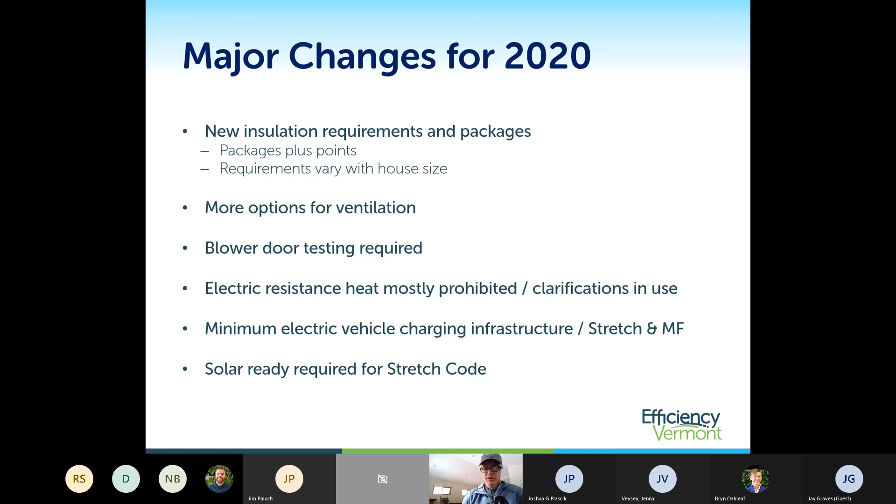At the outset here, I want to make a distinction for everyone in regard to the code and the code handbook. Efficiency Vermont, in partnership with the Department of Public Service, publishes the Vermont RBES handbook, which is essentially a guide to the full code. The ICC published code is the full language of the code. It contains all of the relevant rules, regulations, and guidelines to comply completely and effectively with the code. The handbook is essentially just a summary guide with a lot of actual details in it to help people comply with the code. So the handbook should not be used as a substitute for the full RBES. That's a distinction to be aware of.

You'll see here where you can find access to the two different documents. The ICC website is where you can find the full language of the code, and on the Department of Public Service website is where you can find the handbook, which also has a link there to the ICC site.

Efficiency Vermont's role in all this is we serve essentially as the state's Energy Code Assistance Center. We provide training, support, questions and answers, code support for implementation and application of the code. You can reach us at this number here, our office address, and you'll be connected with one of our customer service teams and/or myself or another energy consultant to answer any questions you may have about the code. The Vermont Department of Public Service is the owner of the code, so they can also be reached with any specific questions.

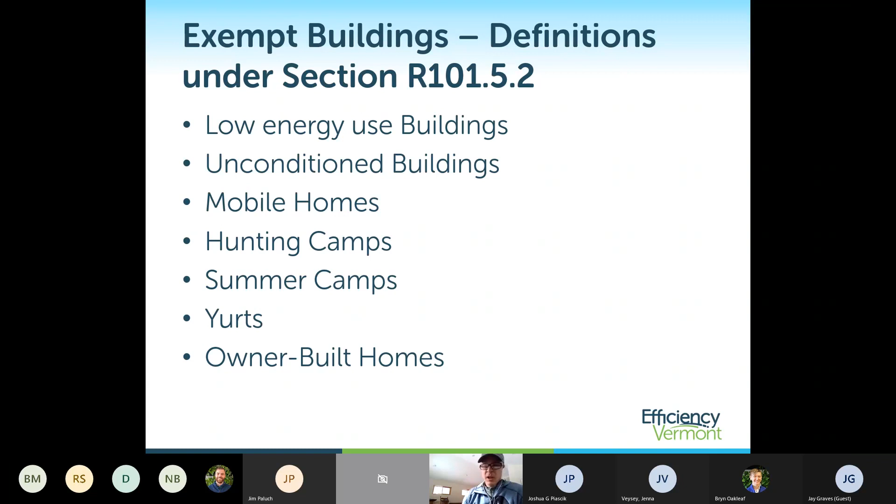Yurts, if you're into that kind of thing, are exempt as well. And then there's specific exemptions for owner-built homes. The owner-built exemption is pretty specific in its application.

In order for someone to use the owner-builder exemption to comply with the code - meaning you don't have to fully comply with all the requirements - you need to be an owner builder building the house for yourself, actually serving as the general contractor and detailing all the construction specifications. You also need to disclose in writing what the differences are from what code requires, and that needs to be disclosed in the code certificate.

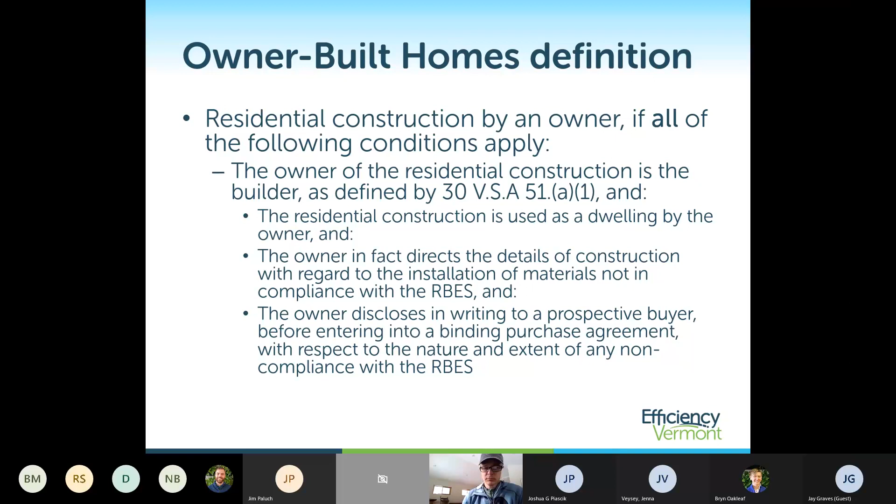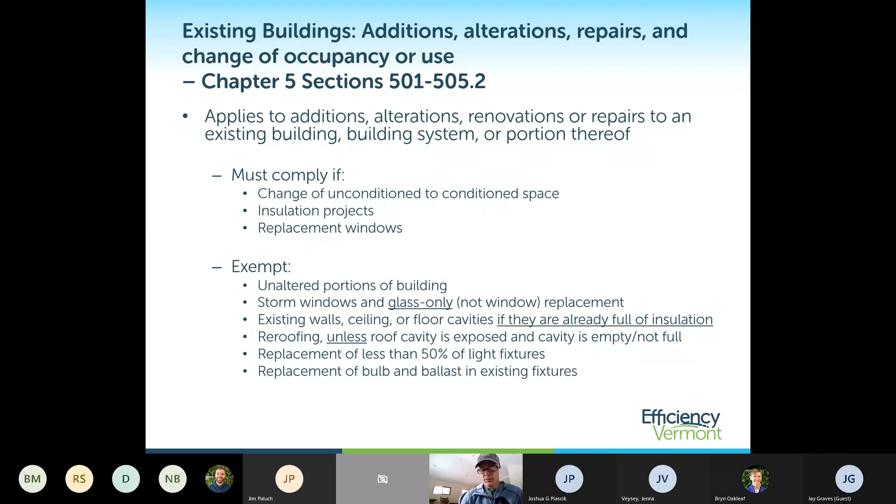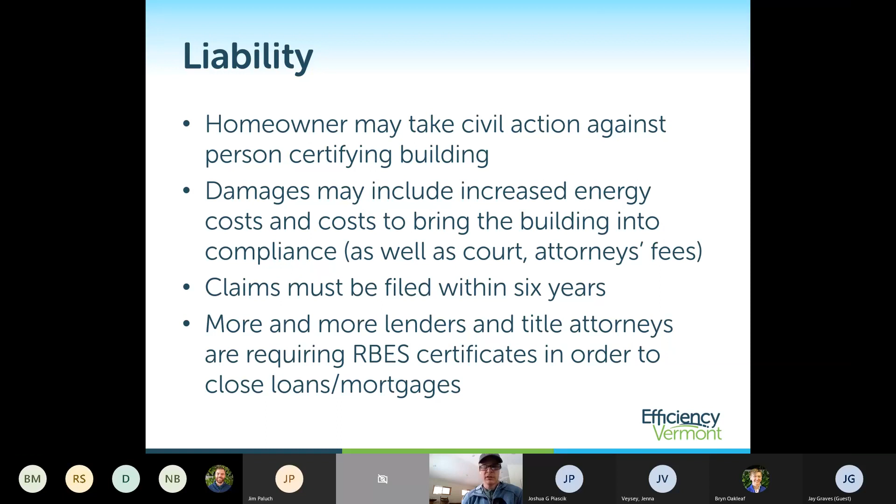There's more awareness now that the code exists and that it is a factor that should be verified in any new construction or major renovation addition project in the state. More lenders, title attorneys, and the real estate and lending industry are becoming more aware of this and expecting to see documentation associated with homes.

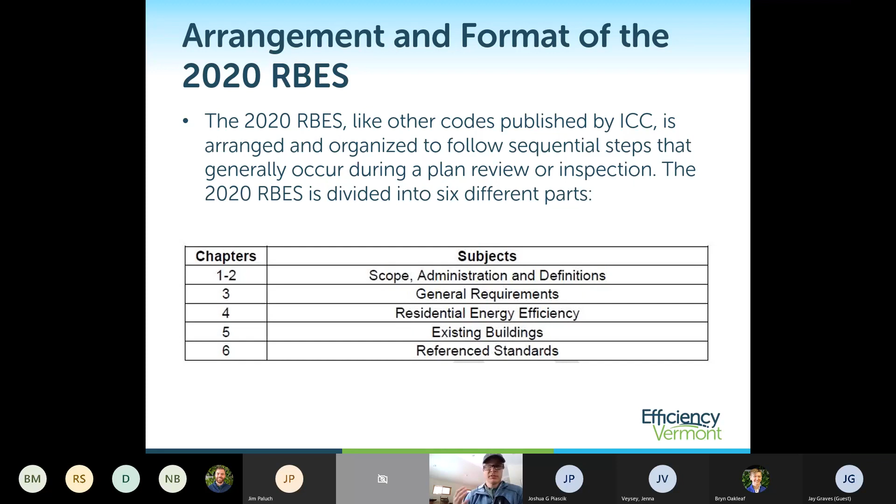Okay, general requirements. The code is basically designed as a construction reference document, so it's designed to be used as a reference point when you're coming up with the design and specifications for the building. The way the code is laid out in chapters kind of follows that process of design and specification. The first couple chapters in the code, referring to the ICC published document, cover the scope, administration, and general definitions for the building. I'm going to go through the slides ahead, which define these things.

Chapter 1 covers what we just went through as far as how the code applies. Chapter 2 is basically a glossary of terms and definitions for terms that you're going to find in the code, and specific definitions of what some of those terms mean and apply to. Chapter 3 is general requirements.

This is defining building load design conditions, what you're using as references for specification for insulation materials, building systems, equipment, HVAC, ventilation, etc.

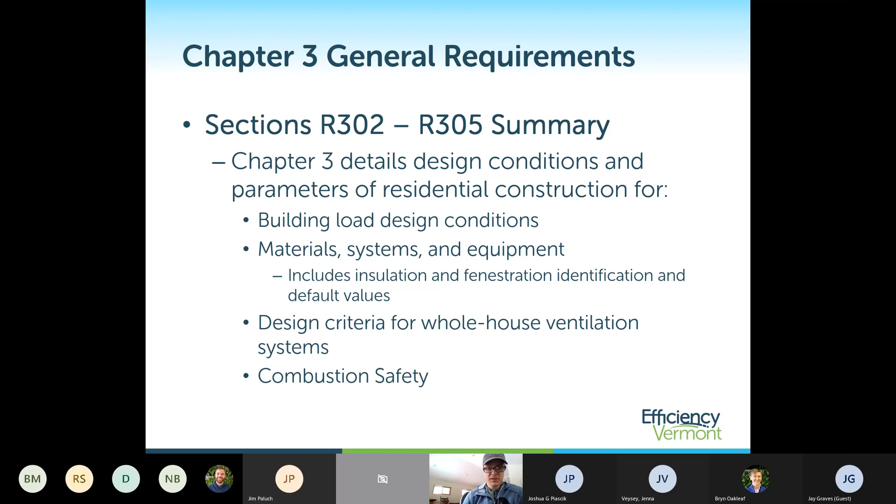Chapter 4 is really the heart of the code, the meat of the code, which contains all of the energy efficiency related requirements. So we're talking relevant R values, window values, air sealing requirements, ventilation and mechanical equipment installation requirements, etc. That's the bulk of the content of the code and what we're going to focus on today.

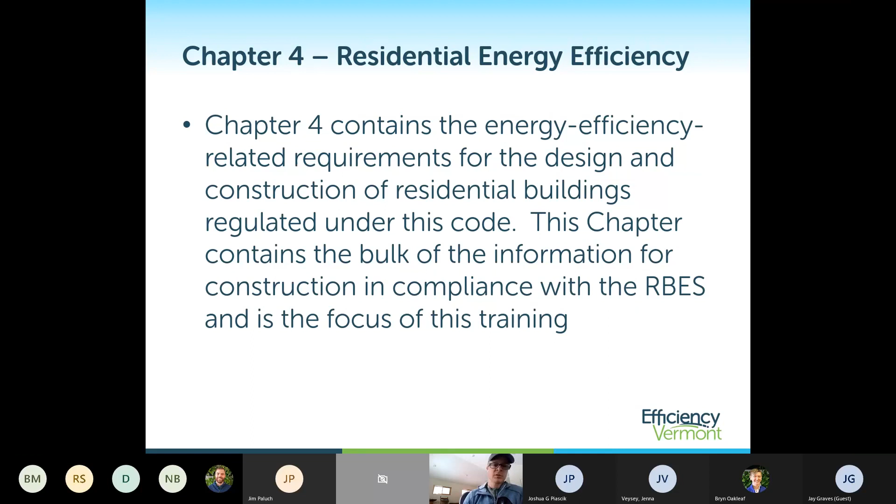Chapter 5 specifically covers the requirements for existing homes and gets into some of the nuances of how that works. Finally, Chapter 6 is reference standards - these are industry-related standards and other codes that overlap with the energy code and are part of the overall code purview when it comes to residential construction.

So we're going to dive now into the details, getting into Chapter 4. You can see this is referencing Section 4, so R4 - this means Chapter 4. If you're going to follow up on some of the content here after the training, the sections that I'm calling out in the slides reference these sections within the code document itself, the ICC code document.

There are 3 different pathways to comply with the code. The prescriptive method is essentially you're picking a package out of a table of 5 different packages, where that package contains different performance specifications for different building components. You can choose a package to follow, meet all of the specifications in that package, and then follow the other general code requirements that overlap with that to comply with the code that way.

Alternately, you can use ResCheck software, which is an online web-based modeling tool that allows you to substitute higher values for lesser values in certain areas of the building, providing a bit more flexibility. Finally, similar to that is the home energy rating method, or HERS rating, where you're actually working with a third party to do the building verification for you. Similar to the ResCheck method, it offers some more flexibility in regard to moving around the component requirements within the building.

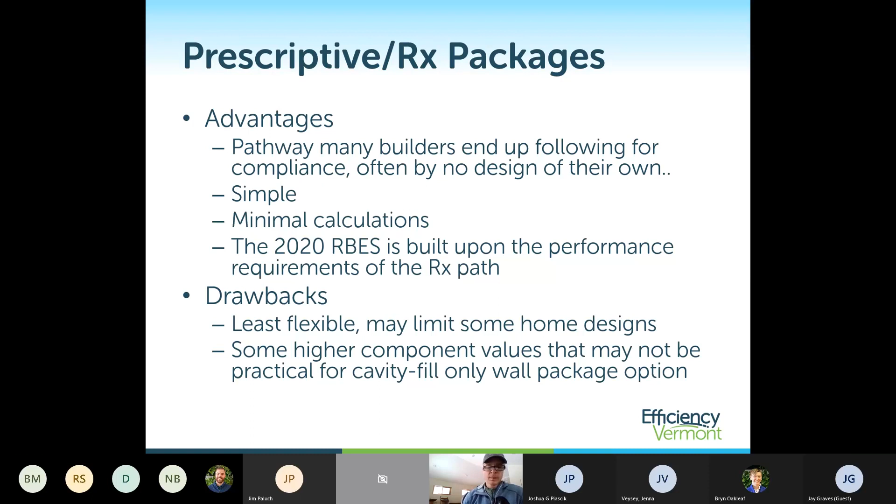The way this is functioned, there's 5 packages here to choose from. This is table R402.1.2.1 in the code, and this is the table you would reference to choose a package to comply with.

Log homes have their own package here, so they're special unicorns in their own right. You have a separate code to reference if you're building a log home. The reason being is that a log home is built out of just that, logs, and it's entirely different in performance than a building built out of dimensional lumber, where you have building cavities to fill with insulation.

So those prescriptive packages you're essentially dealing with for standard stick-built construction are going to be these 4 packages. You're laying out different building component R values - ceiling, walls, foundation walls, windows, etc. What you're looking at here is picking one of these 4 packages to comply with.

Package 4 and package 1 are kind of the two - sorry for PowerPoint getting ahead of me on this - package 1 and package 4 are kind of the 2 most common building envelope packages people will orient towards.

Because what this is showing here is R20 cavity for a wood framed wall. This means your standard above grade framed wall. This is a package where you can build a wall with just insulation in the wall cavity and be compliant with code. Code is moving in the direction of requiring continuous insulation of some type on above grade walls.

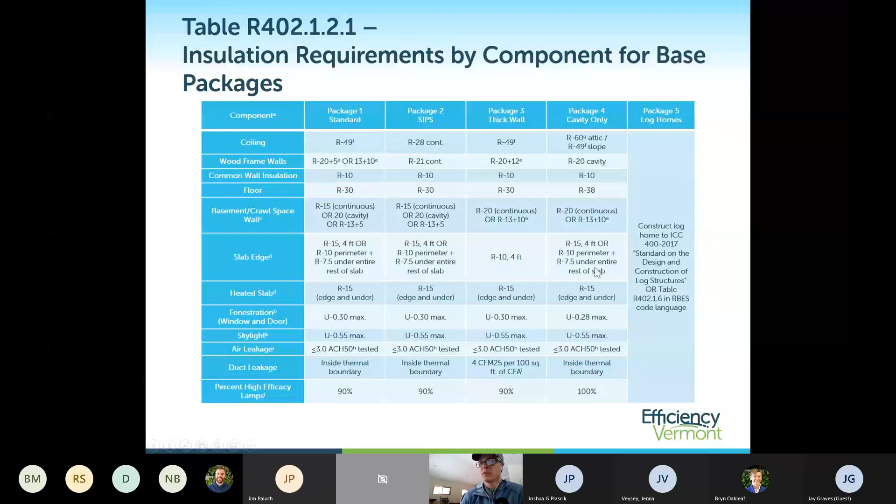The prescriptive package has been around from pretty much the beginning as a way to comply with code. A significant change for 2020 is that now, as well as meeting the specific requirements called out in those packages, based on the square footage of the house, you're going to need to gain points from a points table, which is essentially raising the performance values in parts of the building at your discretion.

To attain the required points here based on the square footage - focusing on single family residential, if you have a building less than 2,000 square feet, you need to meet all of those package requirements and then gain 5 points. If the house is between 2,000 and 4,000 square feet, you need to gain 7 points. Anything greater than 4,000 square feet, you need to gain 10 points.

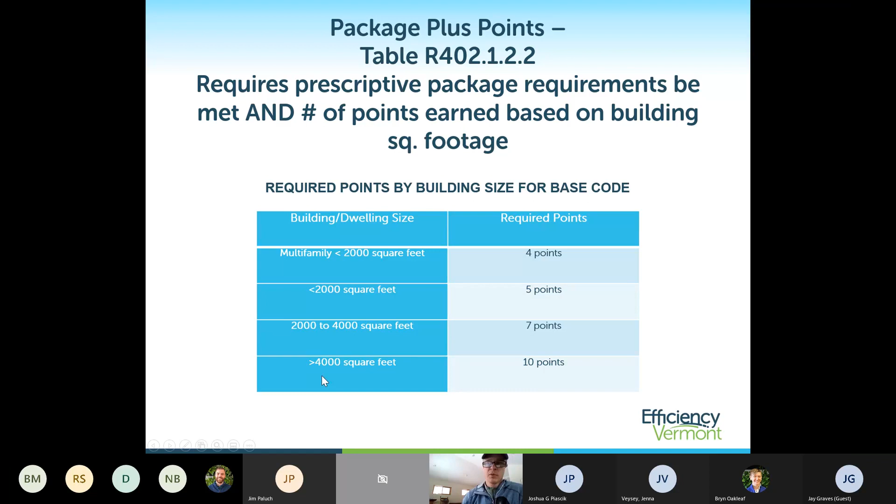So what this means is, in the code, as well as that table that shows you the packages to follow, there is this table which gives you points options for different parts of the building where you can attain points. So if you choose package 4, that's a cavity-only above-grade wall package, where you can do R20 in a stud bay and comply with the code.

If you need to gain points, you can go to this table and choose to do continuous insulation of some type and earn points by doing so. You can add R12 of continuous insulation to that R20 wall and gain 2 points, or go to an even higher performing wall and gain 3 points.

You can up the ante in the attic for insulation, going from R60 to R80 and gain a point. You can install better windows than the minimum called out in the package and gain some points.

There's also avenues for making the building envelope tighter and gaining points there. Going from exhaust-only ventilation, which is allowed in the base code—meaning just using bath fans on controls as your mechanical ventilation requirement for the house, which we'll go into more detail later—you can swap from that to a balanced heat recovery ventilation system and gain points there.

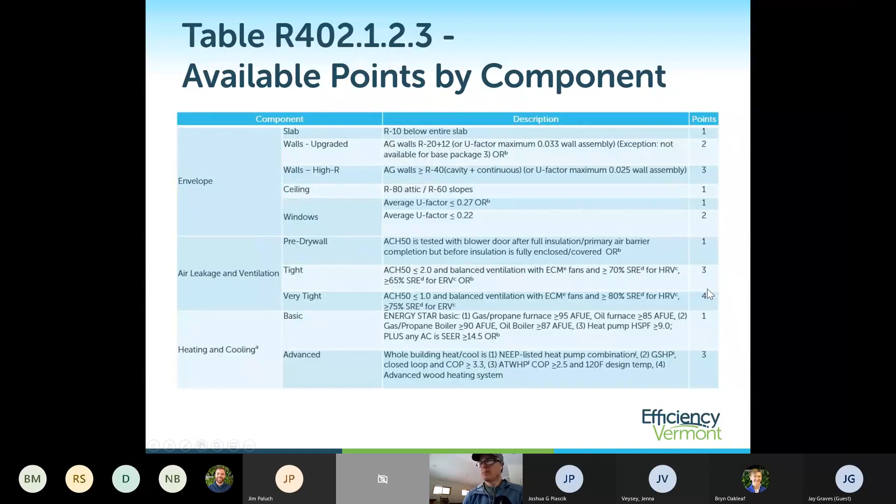You can put in higher performing heating and cooling equipment. You can put in higher performing domestic hot water heaters as well. And there's ways to gain points focusing on water use here in the code as well.

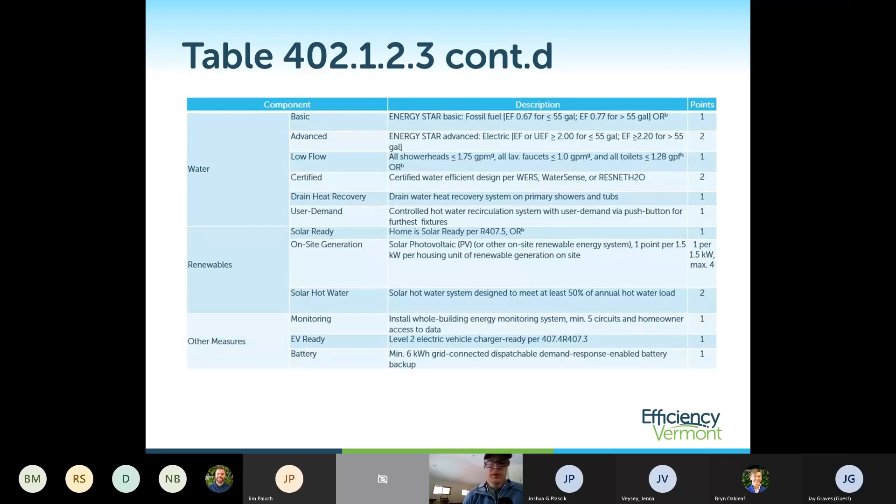So this is a significant change from the previous versions, and something to be aware of as you're going through the options for how you want to comply with the code. Any questions at this point?

Okay, we'll keep the ball rolling here, jumping ahead to stretch code. As I mentioned at the beginning, if it's an Act 250 permitted project, or if you are building a house in South Burlington, you need to meet a higher level of performance, which is stretch code.

Stretch code has packages as well, but you'll see here that it's a higher level of performance. If you need to meet stretch code, you can no longer build a cavity-only insulated wall—you need to be doing a continuous insulation wall assembly of some type. You're also required with stretch code to use balanced heat recovery ventilation instead of exhaust-only ventilation. The window values are a little bit higher or lower, depending on how you want to define it. So there are some performance bumps you need to take to meet stretch code.

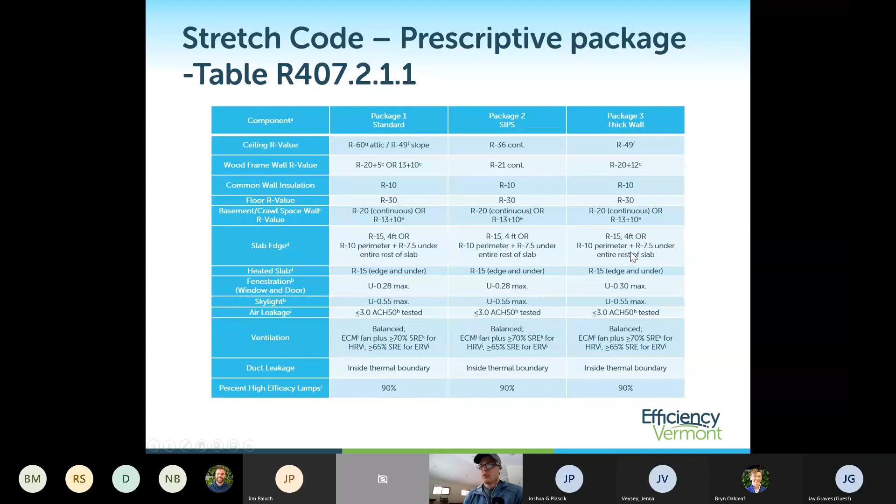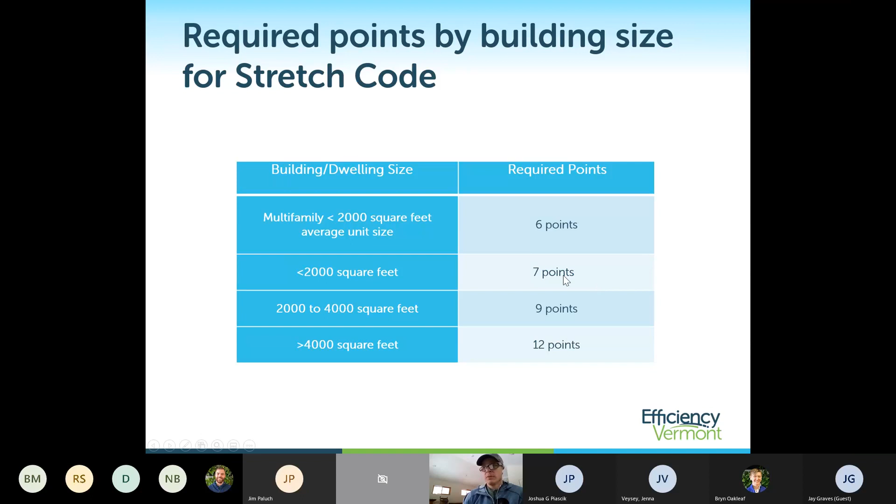Similarly, though, the same as with base code, you still have a points requirement here based on square footage, and you can see that the points to be attained are even higher. So you have a little bit higher threshold to meet in regard to points. So you do need to still meet that.

There are a lot of other requirements called out in the code in Chapter 4, as far as installation requirements and other air sealing details, etc., which we're going to touch on here in a moment. All of those requirements need to be met if you need to follow stretch code as well.

And you only have 2 options to comply with stretch code instead of 3. So you can use the packages approach, the prescriptive package we just showed here, or you can have a HERS rating done. You do not have the option of using ResCheck to comply with stretch code.

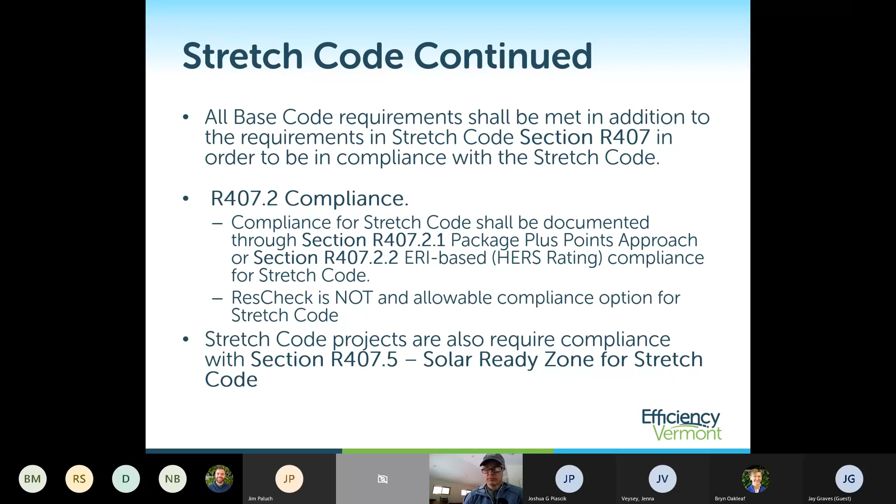So jumping back into base code requirements here. As an alternative to doing the prescriptive packages, you can use a weighted U value or U factor approach to comply with the code. This is essentially an alternative to doing the prescriptive tables.

If you want to use ResCheck as your compliance method, instead of looking at R values in building cavities, you're looking at the overall performance of an assembly by doing a UA or U factor calculation as an alternative to complying with the prescriptive R values in the code. The ResCheck software does that modeling for you, and it is an option.

Though in order to use ResCheck, you do need to up the ante in a couple places—you need to make the building envelope tighter, and you need to have a much tighter air sealing strategy and envelope to use the ResCheck or UA alternative. And again, you need to go from exhaust-only ventilation to a balanced heat recovery system if you're going to use the ResCheck or UA approach.

So just briefly to touch on what this means: R values are basically the resistance of a material to heat flow. U value is basically how well a material conducts heat. So they're an inverse of each other.

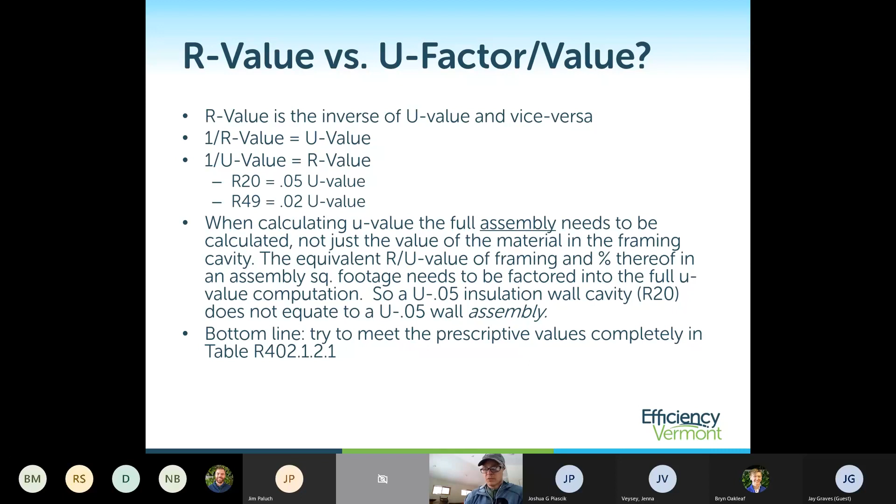Any questions on that?

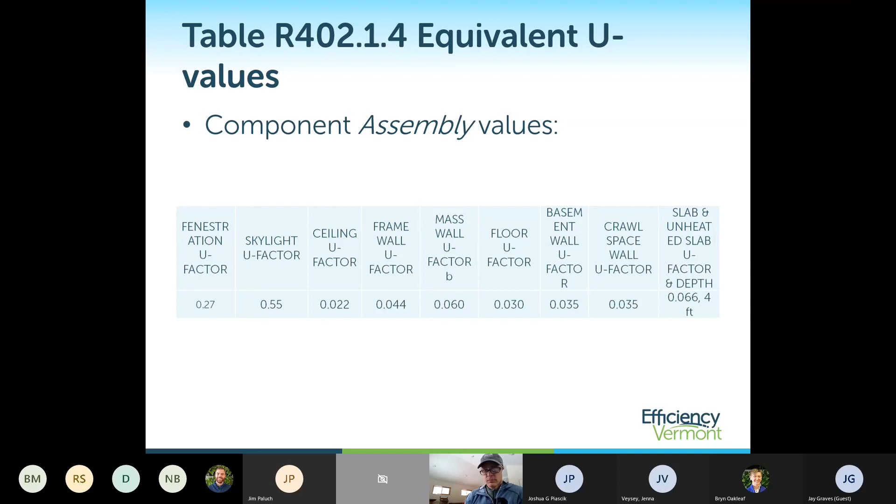Okay, keep the fire hose going here. Some notable alternatives, exemptions or exceptions in the code. There are a few things called out in Chapter 4. As I said, Chapter 4 is kind of the meat of the code, which gets into all of the real details of the building envelope and R values and installation requirements for those areas.

R49 for an open attic is kind of a standard base R value for any of the packages. There is an exemption in the code to use R38 in place of R49 if that R38 covers 100% of the ceiling area. Essentially, at the eave and at the exterior wall dimension, you can have full height of insulation to achieve R38, and carry R38 across the whole ceiling flat, which would be seen as equivalent to R49. Whereas, more typically without a raised heel truss like this, you have reduced R values at the eave because of the diminishing height of the roof rafters coming down to the exterior walls.

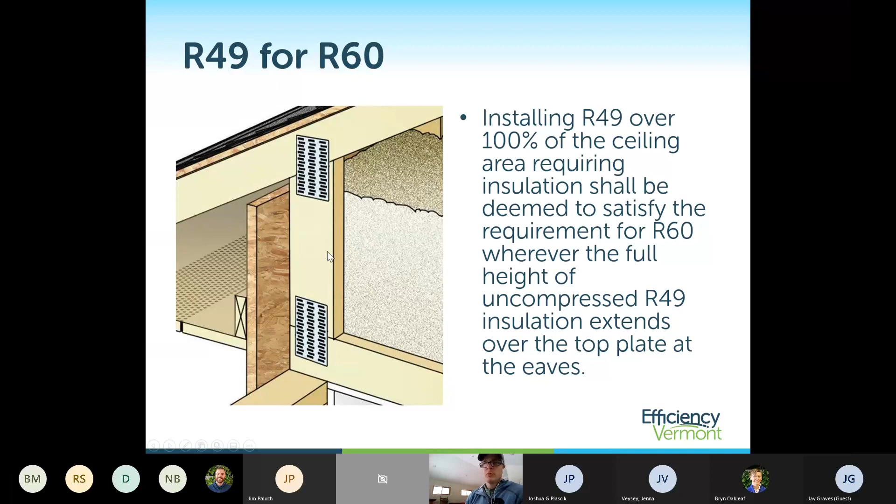Alternatively, where the code requires R60 in a ceiling flat, you can comply with that using R49 with the same performance specification—getting full height of R49 all the way out over the top plates of the exterior walls.

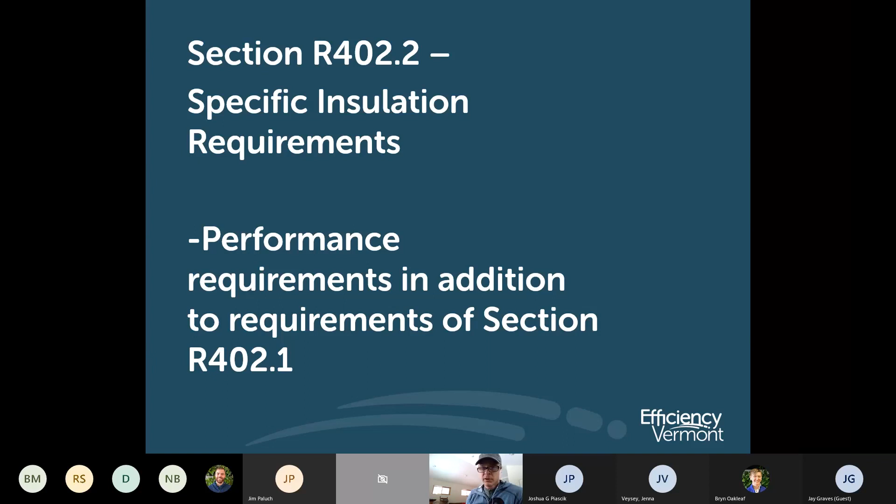Carrying on this theme, some more specific insulation requirements. There's a table and more specific detail in the code, which gets into the definitions and delineations around how to properly install insulation materials, air barrier materials, and vapor control layers within the building envelope. So it's not as easy as just saying I've got an R42 or an R30, whatever, in the building—there are specific requirements on how those materials are installed and how they behave together.

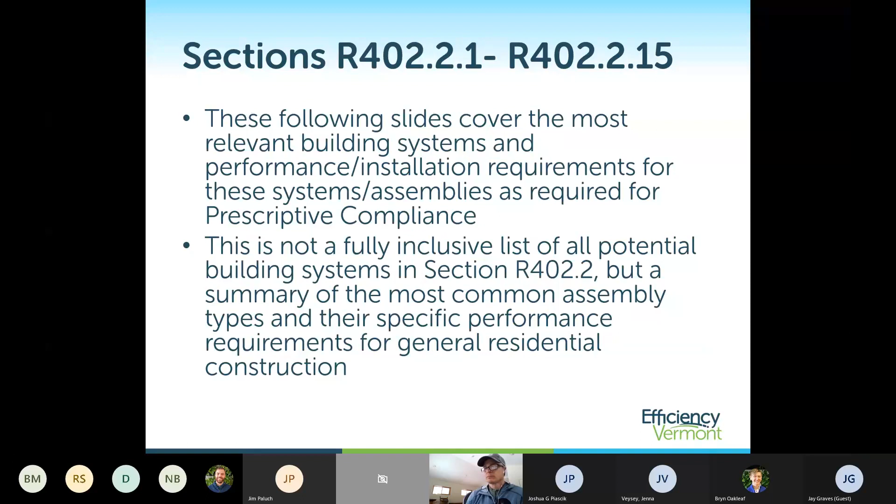Any building assembly is a system of parts and components and pieces. It's like a giant Lego set, and you got to make sure that all of those parts and components and pieces are interacting appropriately together and behaving well together. That's the reason why there are these types of call outs in the code, to make sure that proper alignments occur when putting the building together.

One of the bigger things to be aware of in this section is unvented roof assemblies—basically cathedral ceilings, vaulted ceilings. There are some concerns about different approaches to take when you're putting that sort of closed cavity together, so there are specific options in the code called out about how to put together a cathedral, vaulted, unvented roof assembly.

It can be air impermeable, meaning the insulation material put into the rafter bay will not allow air to move through it—that's an air barrier type insulation. Alternatively, air permeable insulation can only be used in the cavity with some additional built up continuous insulation on the roof above it. A third option is a blend of those two, where in the rafter bay you have a mix of air impermeable and air permeable insulation. This is kind of referred to as a flash and fill assembly.

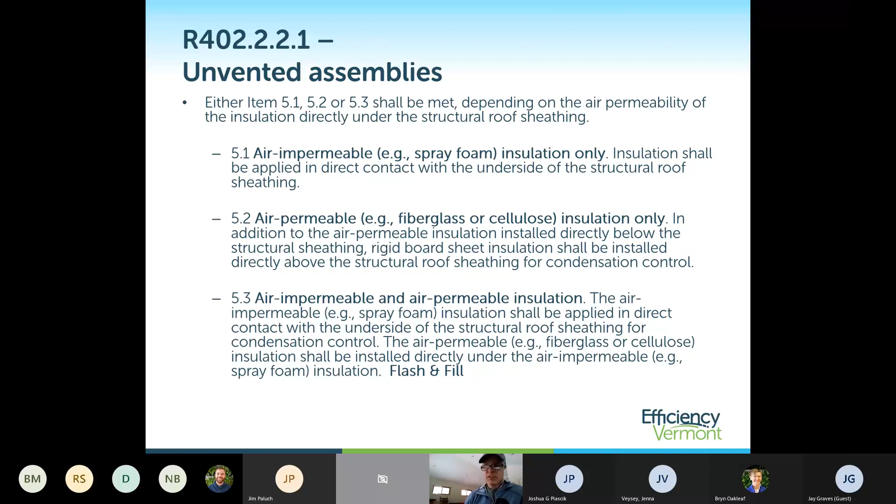As an alternative to this pathway, there's the flash and fill approach, where you're actually installing closed cell foam to get half of the R value required in the assembly, so half of R49, spraying that against the roof deck, the roof sheathing, and then filling the balance of the cavity with cellulose insulation or blown in fiberglass, or sometimes a batt of insulation, rock wool or fiberglass.

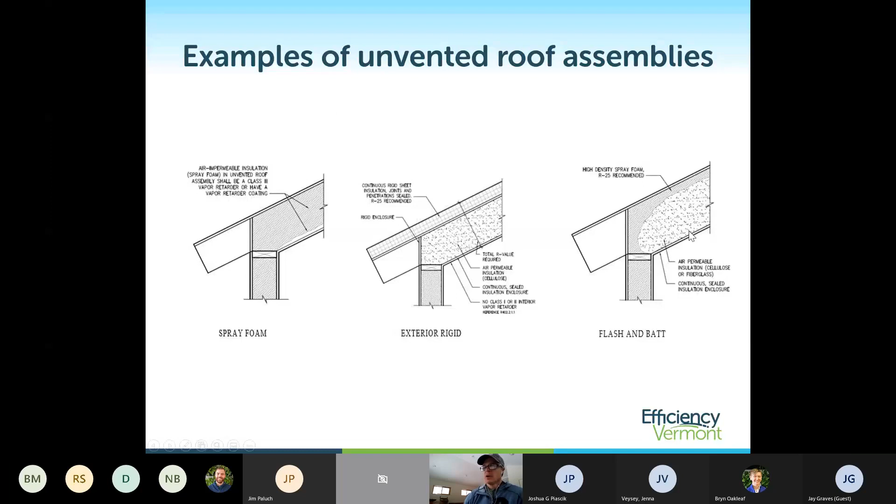Just to reiterate this in a little more detail, again, air impermeable, spray foam only. It has to be closed cell foam. It cannot be open cell, because open cell foam will allow moisture vapor through it. Essentially you're protecting the roof deck from condensation by having significant R value in the cavity and R value that does not allow moisture vapor to move through it.

Alternatively, cavity only insulation, or cavity insulation that is air permeable, so cellulose, fiberglass, mineral wool. You can do that without a ventilation cavity as long as you're protecting the roof sheathing by having adequate R value of rigid foam insulation, or rigid insulation of some type, above that roof sheathing. So that's an alternative.

And then again, the flash and batt approach, where you're putting closed cell foam directly against a roof deck to half of the required R value, and then you're building out the balance of that with fiberglass, rock wool, cellulose, etc. Any questions on that?

Sure, looks like we have a question. Evan? A couple questions popping up. Feel free, if you can unmute yourself, feel free to speak. So I have a question. Go ahead. Sorry, it's relating to fenestration.

If I just, when calculating your average U value, you said total assembly, which is, I'm assuming, center of unit as opposed to center of glass value. Can we take the average center of unit U value instead of having to do a formula using square footage of glass?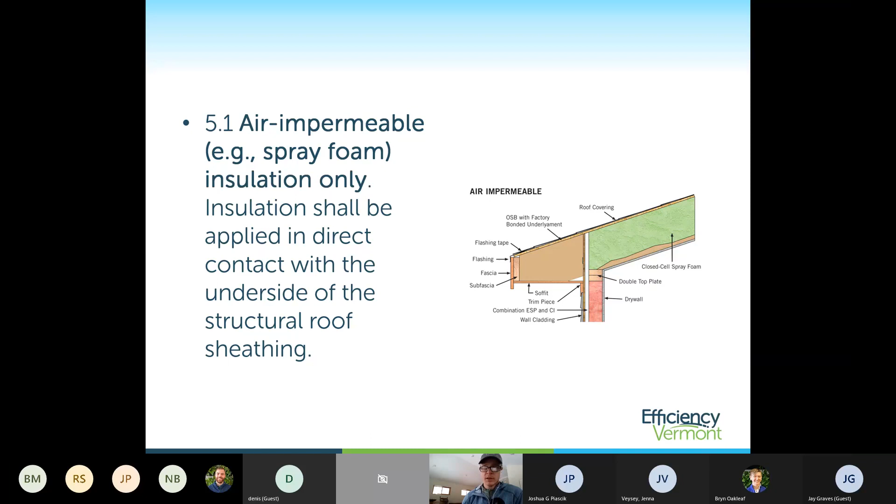So probably the bomb-proof approach is filling the cavity with closed cell foam to the appropriate R value, making sure that foam's installed under the right conditions so it doesn't shrink in any way, so you're not putting yourself at risk of condensation on the sheathing. Again, these other two approaches can be just as equally effective and perform just as well, so long as you're taking into account that you're getting 50% of the R value in the closed cell insulation material and the other remaining 50% in the vapor open type.

And ultimately, if you have the ability to install an air vent channel, that would be even better yet. An air vent channel is only really coming into play if you're using fiberglass, rock wool, mineral wool, a vapor open, vapor permeable insulation, and you're trying to just get that R value in the rafter cavity.

The trick with it right now is that any cathedral or vaulted ceiling needs to meet R49 in the code. So trying to get R49 with fiberglass, rock wool, mineral wool, or any fiber insulation in a 2x12 rafter and get a vent space in there is not attainable.

You have to go to a TJI or another type of rafter assembly to get it deep enough to accommodate that R value in fibrous insulation. So what you're saying is, if you go with spray foam filling the entire cavity, there's no need for an air channel. Correct. Yep. And the spray foam guy that I just did a house with highly recommended a vent channel, saying the spray foam will last a lot longer and you don't get any deterioration underneath the OSB if you have a vent channel. So, that was just an opinion, basically.

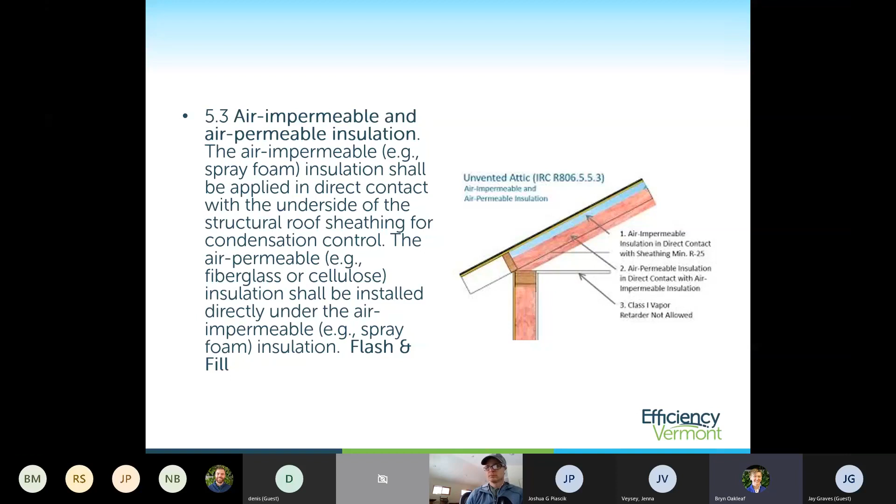One other important requirement, regardless of ceiling type, whether it's a flat open ceiling or vaulted rafter cavity, is eave baffles preventing air from the soffit and outside of the building from interacting with the insulation in the ceiling flat or rafter bay. So you need some sort of air impermeable barrier at the soffit to keep air from mixing with this insulation. That's a big one to attend to.

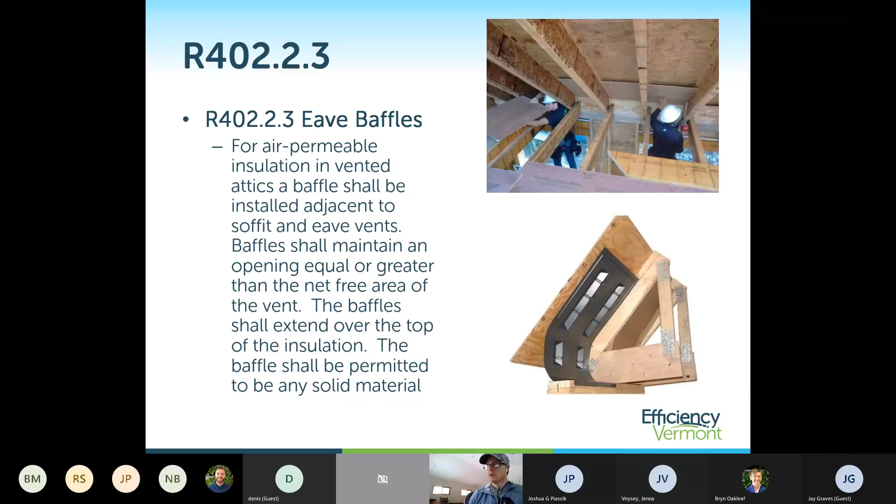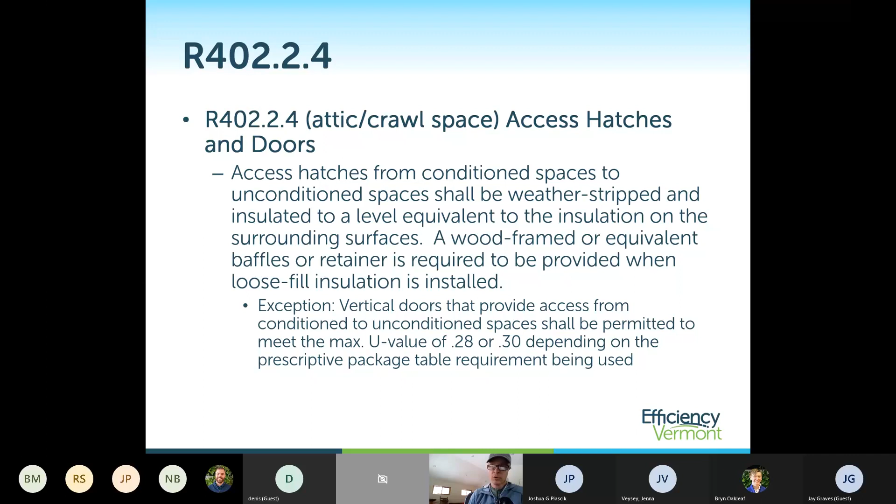Access hatches and doors: anything going from a conditioned space to an unconditioned space needs to be treated like an exterior entry door. If you're going into an attic, the intent is for that hatch to be insulated to an equivalent R value, or close to it, of the ceiling or attic assembly it's going into. So we're talking a baffle to retain the insulation in the space above it, adequate R value typically using rigid insulation on the back of the access panel, and then a gasket to make that panel airtight when it's resting against its stop to get into the space above it. If you're going into a knee wall space, the same approach applies.

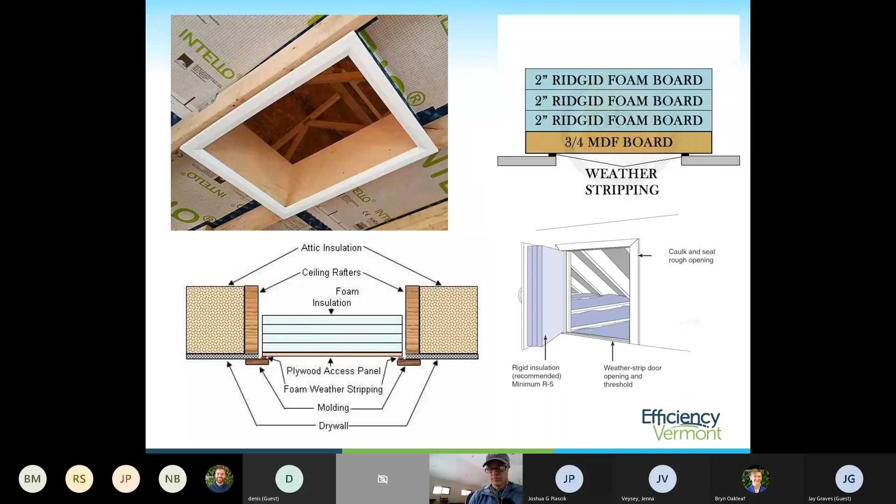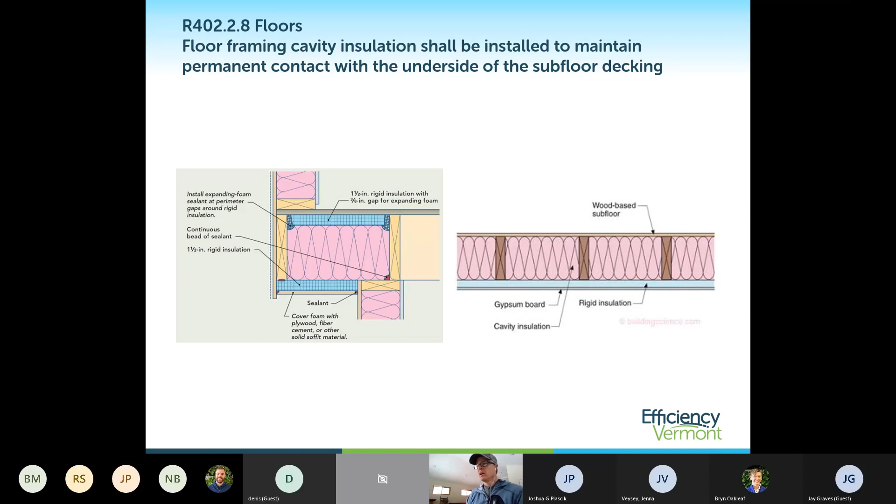Floors: if you have a cantilevered floor or a floor assembly insulated over unconditioned space, the insulation needs to be installed in that cavity in permanent contact with the floor system above. You don't want an airspace between the insulation and the floor deck above; it needs to be in full contact all the way around. Again, these aren't all the details required in the code—this is just a summary of some of the high points of the more common details.

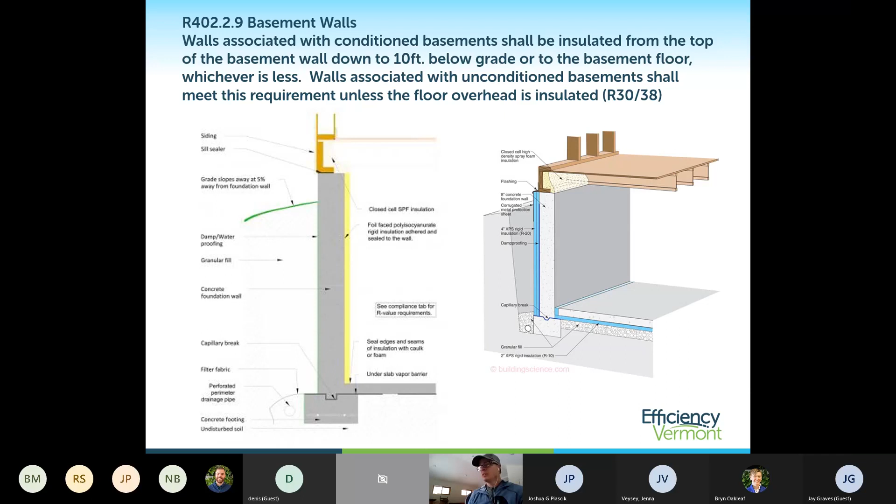Basement walls, foundation walls: any conditioned basement or space that contains distribution equipment for heating or conditioning the house needs the walls fully insulated down to 10 feet below grade or to the basement floor, essentially insulating the entire wall. The only exemption is if that space is truly unconditioned, then you can insulate the floor system above it instead. The code doesn't specify that you must insulate the inside or outside of the foundation—you can insulate a little on either side, or frame a wall in front of the foundation. There are different ways of skinning the cat here, pardon the pun, Tom. So there are different ways to achieve this.

You're not bound to one way of insulating the wall versus another in the code. It just comes down to the R value requirement. That said, if you are going to insulate the foundation from the inside and it's going to be left exposed, unfinished, then you need to use a rigid foam board that has a fire and ignition barrier approved facing on it as an assembly. Or if you're using spray foam insulation to reach the required R value for a foundation wall, that foam also needs a thermal ignition barrier paint or coating on it.

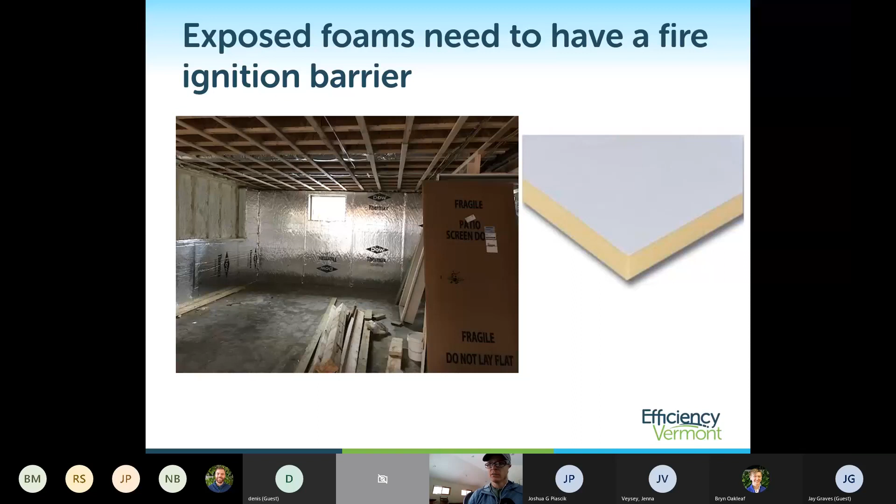Insulated slabs are only required if you have these conditions—where it's an exposed slab to ambient outside conditions, or if it's a heated slab. The code does not require you to insulate under a slab if it's an unheated slab that is below grade. So if you have a standard 8-foot basement and foundation, and it's just a rat slab down there that's not heated, that slab does not require insulation under it per code to comply.

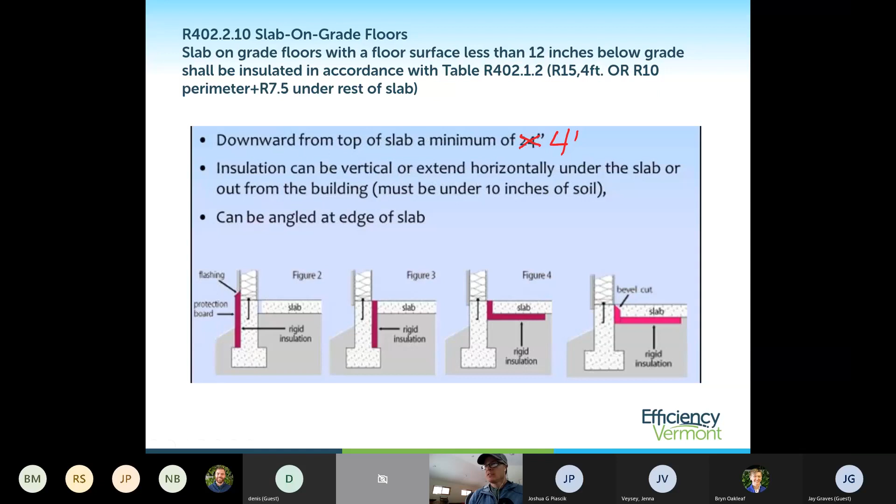From a building science standpoint, it's highly recommended that you still put something underneath that slab because concrete is highly conductive and can have a big impact on comfort and energy load to the house, as well as be a condensing surface in the summer months. But that's just a distinction to call out in the code.

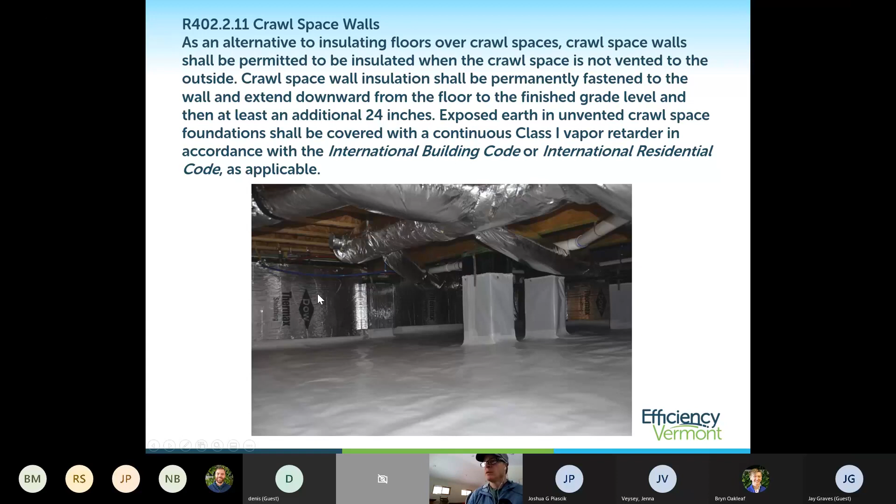Crawl spaces. As an alternative to insulating the floor system, if you have distribution in that crawl space, as you see here, then foundation walls can be—or would need to be—insulated in this circumstance to the same requirements as a basement would be. If there's just an excavation down here with exposed soils and dirt, then you need to put a vapor barrier over all exposed soils, integrated into any insulation materials on the wall system as well.

So, walls—wood framed walls, above grade walls. The code's trying to account more for moisture management in wall assemblies and how to retard moisture migration into framed assemblies as much as possible, while also accounting for the ability of those walls to release moisture and dry out, as and if they do accumulate moisture. It's just physics here, folks.

To some extent, closed cavity wall assemblies in general are going to load moisture during the heating season. You want to keep that moisture loading as minimal as possible by putting in effective vapor retarding measures in those wall assemblies. But you also need to be sure that moisture which does get into those walls has a mechanism for drying when conditions allow, as the weather warms. That drying can occur to the outside, or to the inside, or both ways, depending on the assembly you decide to specify. There's more detail called out in the code relating to this—the code handbook has great content to help guide you through some of the assembly options available to achieve this.

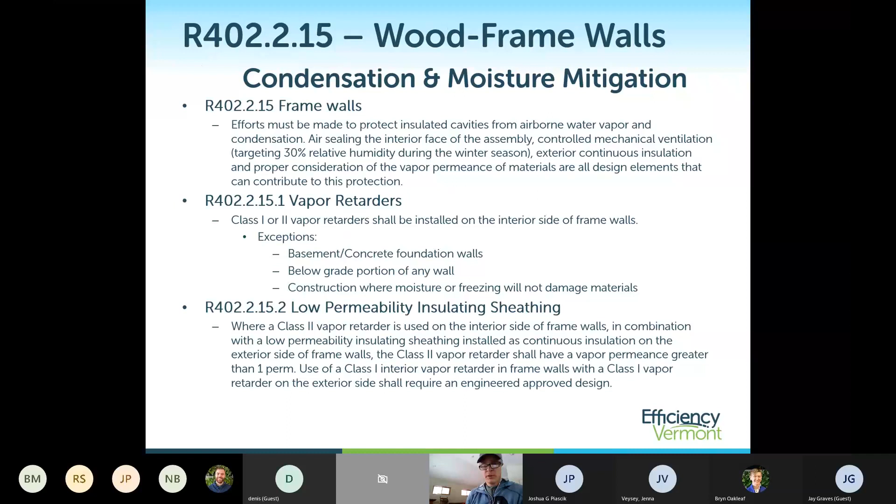One of the more specific call outs is for exterior insulation assemblies, where you're putting rigid foam board on the exterior of a wall. Essentially, you're putting a vapor barrier on the exterior if you're using foam insulation—so that wall is not going to be able to dry to the exterior, no matter what sort of Tyvek, Typar, or other WRB you put on the outside. The foam itself stands as a vapor barrier. In those assemblies, you need to make sure you have drying capacity to the inside of the building, which is where we look at the vapor permeability of different materials. This specifically calls out options for using class 3 vapor retarders on the inside of a building, allowing for drying potential to the inboard rather than the outboard side.

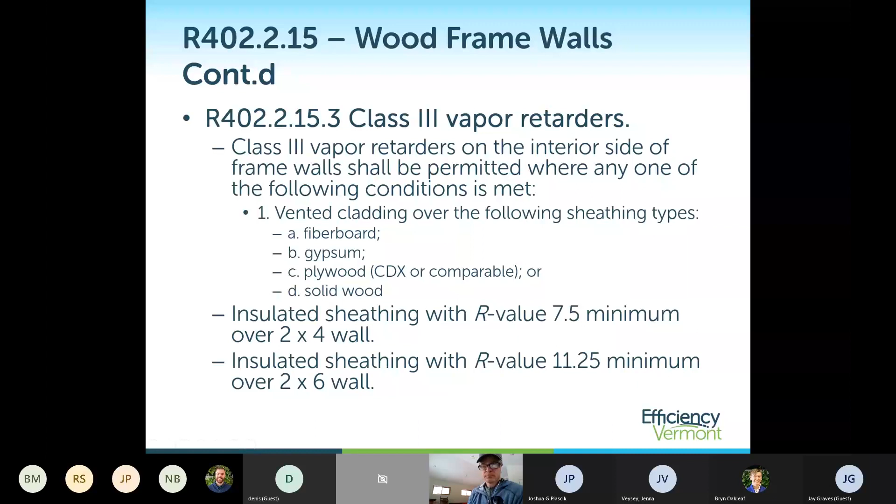What we're really trying to aim at here is don't create a vapor barrier sandwich, where you have a wall assembly with essentially a vapor barrier on the exterior and then a material on the inside of the wall on the inboard side that is also a vapor barrier. Because that's where you're going to trap moisture in a wall, and it's going to eventually just sit there and fester, and it's going to return the OSB back to its happy place, which is bark mulch, and the wall will start to deteriorate rapidly in those conditions.

So you need, again, a drying mechanism at least one way, and there's certainly argument and methodology pushing in building science towards wall assemblies that can dry in both ways whenever possible.

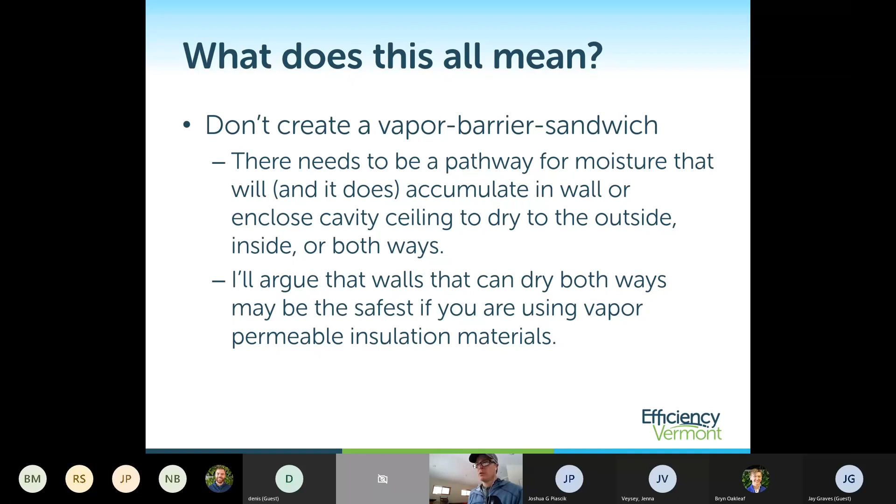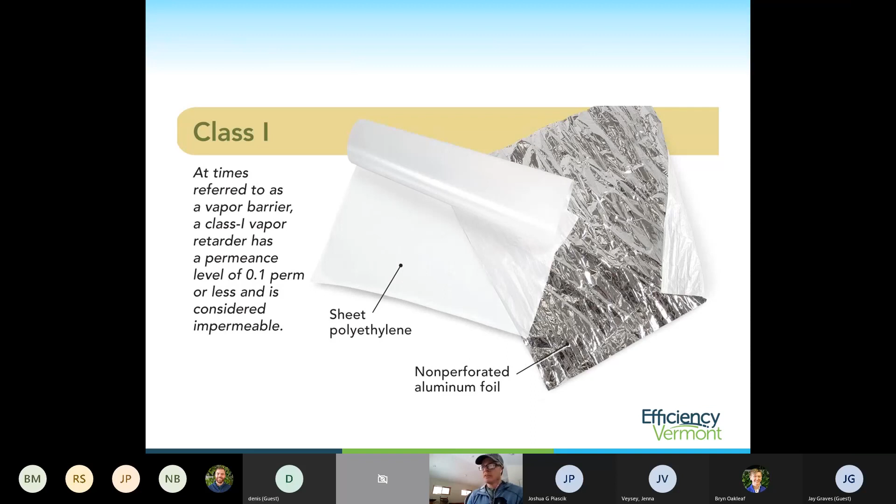So just to touch on some of the details of definitions here. Class 1 vapor barriers are any material that has a vapor permeance of less than 0.1, essentially something you're using to try to keep moisture out. This is your standard classic 6 mil poly or aluminum facings, aluminum foils.

Class 2 vapor barriers are a material that has a perm rating between 0.1 and 1 perm. These do a pretty good job of keeping moisture vapor out, but they do have some capacity for moisture vapor to still move through the material, breathe back through it, essentially. Kraft facing on fiberglass has that capacity, as does XPS insulation an inch thick or greater.

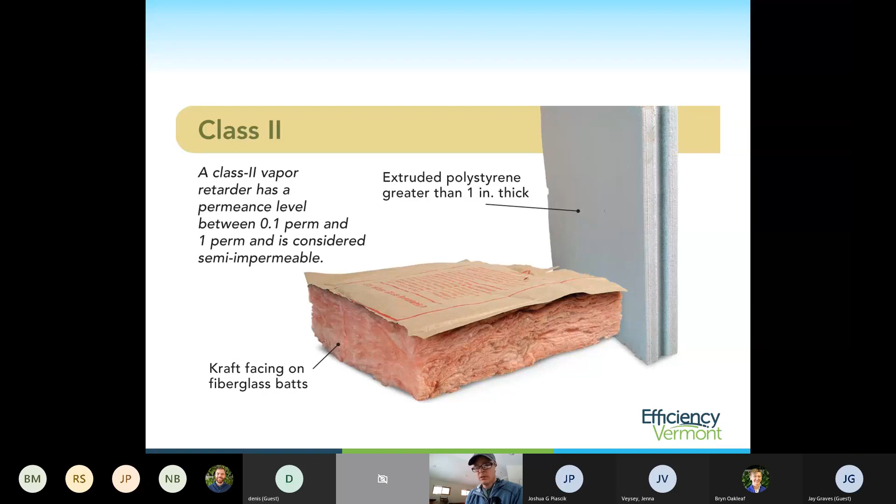And then class 3 vapor retarders are materials that have a perm rating of 1 to 10. Most WRBs, roll WRBs out there like Tyvek or Typar, usually have a perm rating for comparison of about 15 to 20.

30-pound roofing felt has historically been used as a good exterior WRB that is excellent at stopping bulk water and rain-driven water from getting to the sheathing behind it, while still allowing a lot of moisture vapor to pass through it from the wall assembly behind it.

Latex paints, and there are specific vapor retarding latex paints available on the market, are used on the inside to try to prevent bulk loading of moisture into the wall, but still allow drying inboard. Plywood, as an alternative to OSB, also has much better vapor permeance than OSB does. A lot of OSBs really only have a permeance rating of like 1, where plywood, because it's dimensional lumber that's just sawn and laminated together, has a much higher permeance rating, so it can be considered sometimes as safer in an assembly than OSB.

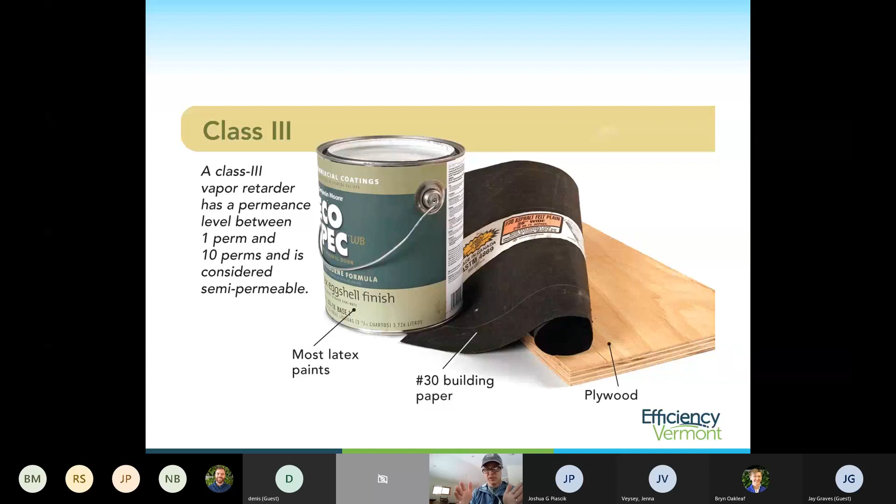But all these things, it all depends on the overall interaction of all the materials together in the assembly. So it doesn't restrict you into what materials you can use, you just got to make sure they all behave together well.

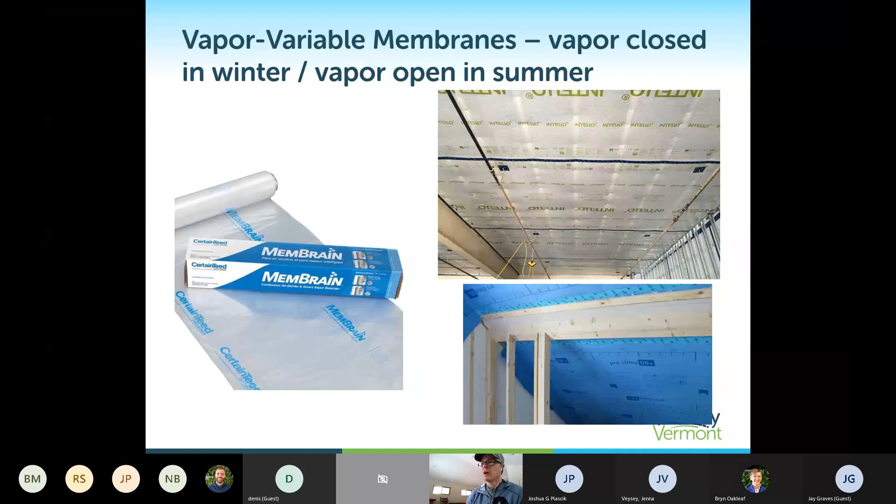And then finally, there are vapor variable membranes. These are materials that will retard vapor flow under winter type conditions, but then they'll open up in warmer conditions and as the seasons change to allow for drying to occur inboard.

Jumping into windows, we kind of touched on this already. We're talking about window U values for the entire building. You can use a weighted average of all the windows in the building to comply. So if you need to meet 0.28 as your U value for a package, you can have 0.29 windows or even 0.30 windows in the building, just so long as all of the windows together as an aggregate average out to be 0.28 or lower.

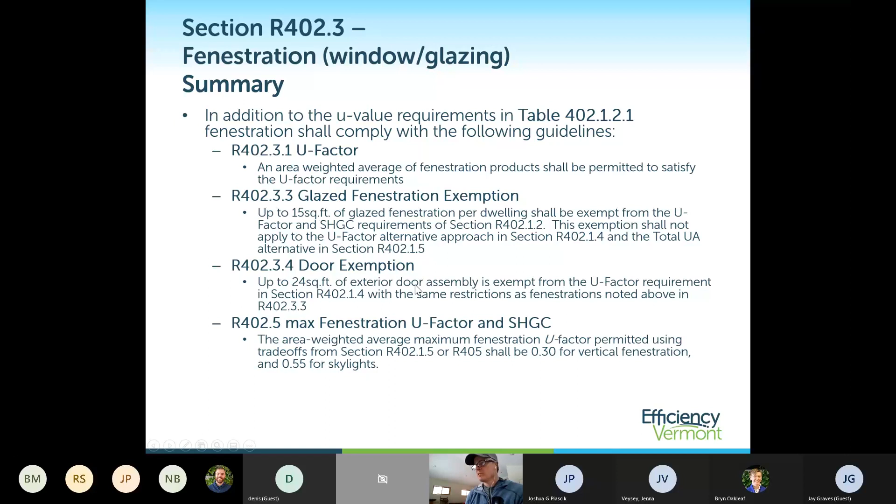You can exempt a certain square footage, 15 square feet of glass can be exempt from those U value requirements, and 24 square feet of exterior doors can be exempt from the U value requirements for doors.

Next section here is on air leakage. I know we're coming up on time, I still have a few slides to go through here based on questions, but any questions that came up in that last section there quick?

All right, well, I'll keep running through here. Yep, that sounds good. Thank you, Steve.

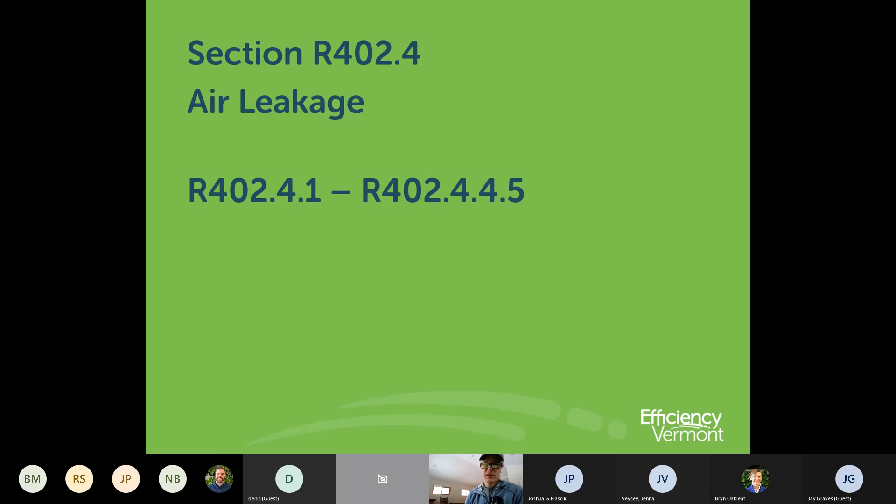I'll go through these slides relatively quick. This section of the code, R402.4, and our section of R402 in general, covers specific details about how to detail the air barrier in the building. This is crucial to get an airtight envelope to meet code requirements for air leakage, as well as protect you from moisture interactions within assemblies, condensation, and risk for mold and building degradation. So paying attention to the details in this section about how to properly specify air barriers within the building is worth getting into in more detail.

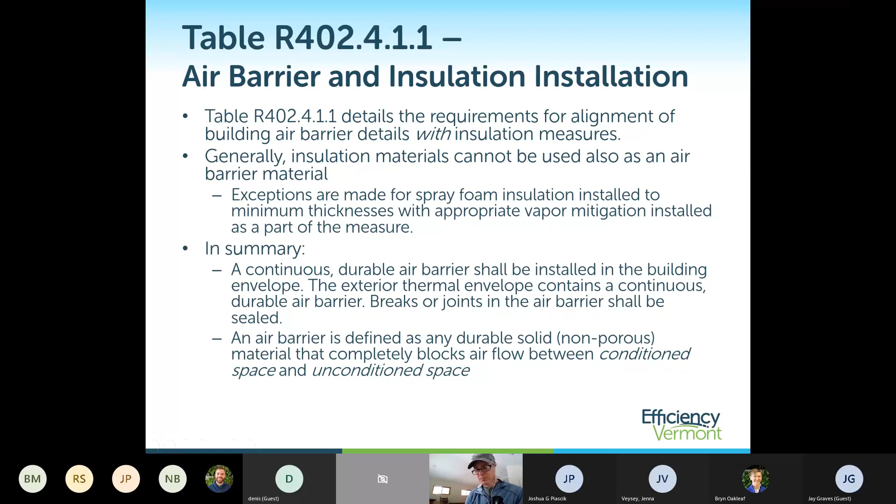The handbook has a lot of good detail on this as well, so I highly recommend taking the time to look through that. But essentially, in concept here, you want a properly detailed continuous air barrier in alignment with and in contact with the insulation materials going into the building assemblies. Anywhere there's a penetration in the building envelope, you need to make sure that's sealed up tight before you start adding insulation to that assembly.

Attic spaces, recessed can lights—thankfully we're starting to see these go away because of LED fixtures not needing this huge bump up into an open attic space—but things like this that exist in an attic need to be sealed up and made airtight. Wiring penetrations for wiring runs through wall top plates, plumbing vents, you name it, those sorts of things all need to be sealed up before you start insulating an attic space.

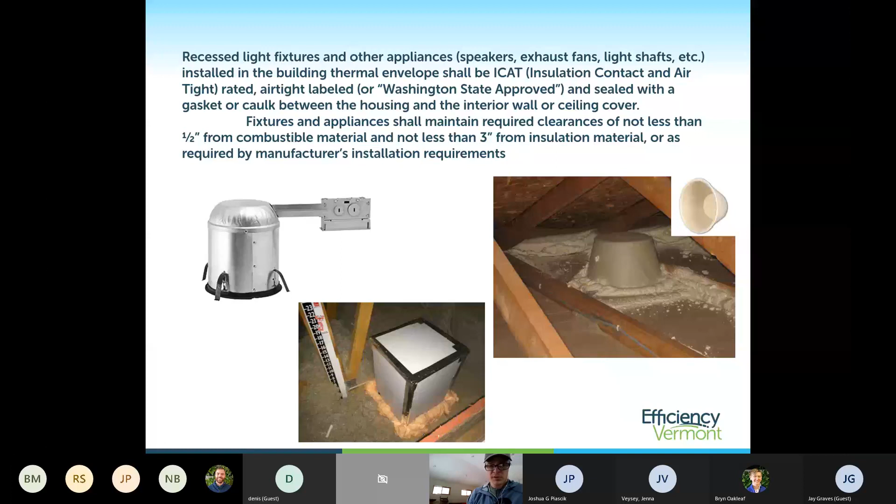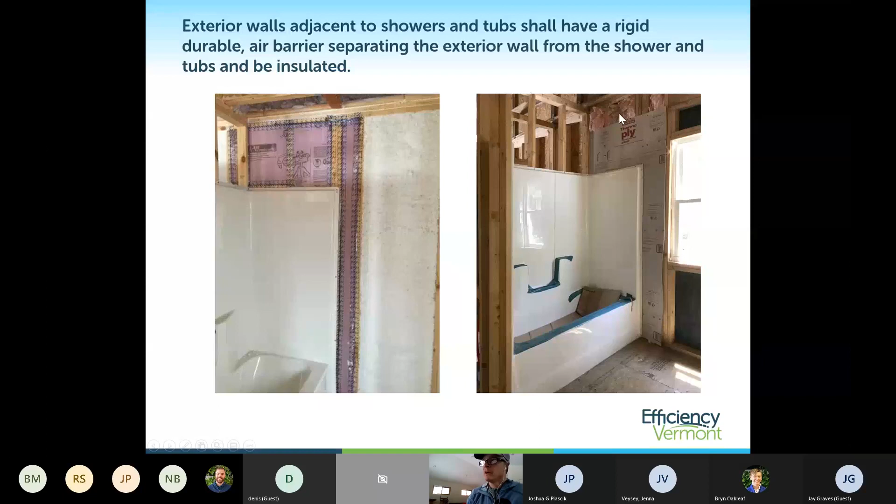A big one that's often historically overlooked is where you have a tub or shower wall abutting an exterior wall. You can't just put it on the wall cavity with open exposed fiberglass behind it, because you're guaranteeing a rotten wall at some point down the road behind that tub enclosure, since there's nothing stopping warm, humid air from coming into contact and moving right through that fiberglass to the cold sheathing behind it. So you need an air impermeable material between that tub surround and the insulation in the cavity behind it, unless you're using closed cell foam or a vapor impermeable insulation in the cavity behind it.

And then finally, at the end of a project, the code now requires you to have a third party come in and test the building envelope with a blower door to verify that you're not exceeding the 3 air changes per hour requirement in the code. Stretch code requires 2 ACH 50, or 2 air changes per hour, a more stringent requirement for air leakage. Using the REScheck path or the HERS rating path requires that as well.

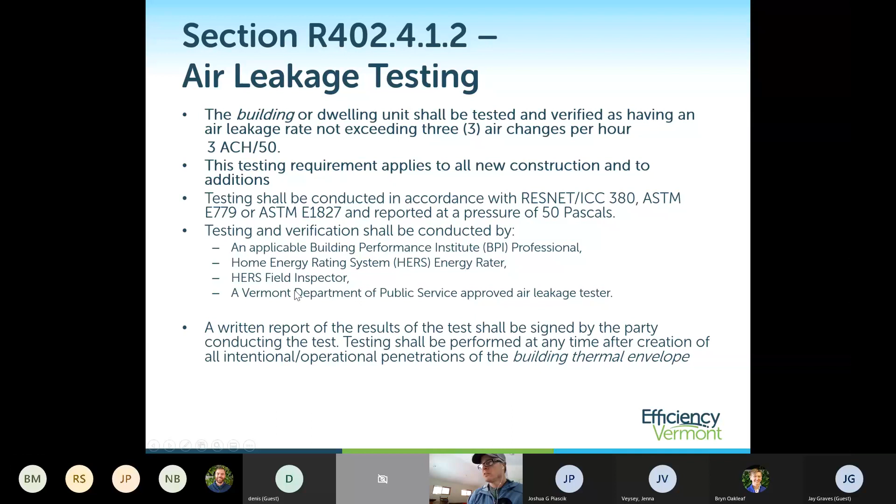We have a list of certified professionals who can do blower door testing on our website, so you can find people who can do that work for you. I highly encourage builders to invest in blower door equipment, because it's just as much of a tool in residential construction at this stage as the table saw, circular saw, nail gun, or compressor. It's a way to verify you're putting the building envelope together right, not just to comply with code—that's a secondary benefit. It really is to cover your butt and make sure you're doing the details right, so you have a durable building assembly and aren't putting yourself at risk of liability for damages in that building over time.

Finally, a few other things to call out: combustion safety is a big part of the code now too. Basically, any home compliant with the 2020 RBES is considered of unusually tight construction as defined by the fuel laws and fuel codes. That means any combustion equipment in a home needs to be closed combustion, sealed combustion—not relying on combustion air from inside the house to burn the fuel or to move combustion gases up a chimney out of the house. That's a general rule for any combustion equipment in the building.

And it does apply to wood burning equipment as well. So a fireplace or a wood stove in a home needs to have combustion air brought to the firebox, and if it's a fireplace, it needs an airtight gasketed enclosure over the firebox. This is there to keep smoke from coming into the house, ensure adequate combustion air for burning the wood, and make sure smoke comes out of the chimney and out of the house.

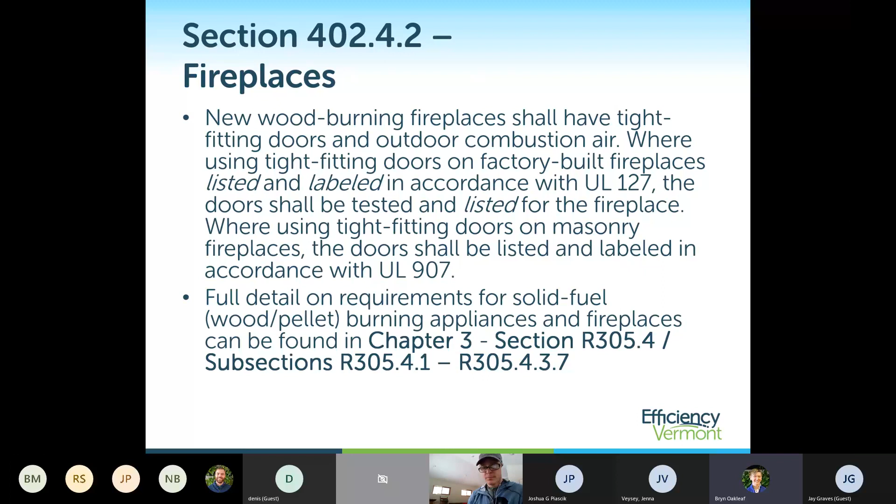I think you made this clear, but just for clarification, you can pick your package one, meet all the basic requirements, fill out the entire certification form, but if that blower door test isn't complete, you technically can't get that certification complete, correct? You have to have a blower door test. Correct, that is part of the compliance methodology at this point, you have to have that blower door testing done.

One thing I'll call out quickly is a way you can gain a point in the code is to have a blower door test done before you put your drywall up as well. So if you have a blower door test done when you've finished detailing all your air barriers and you're ready to close it all up, that will show you where you are in alignment for meeting the air leakage requirement at the end of the project. It's a way to verify you're moving down the right path and troubleshoot anything that may come up. So just an option out there to consider.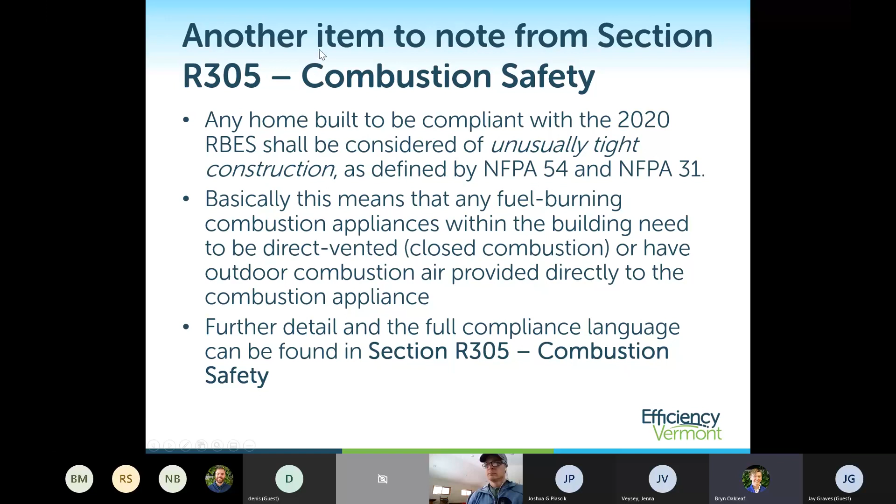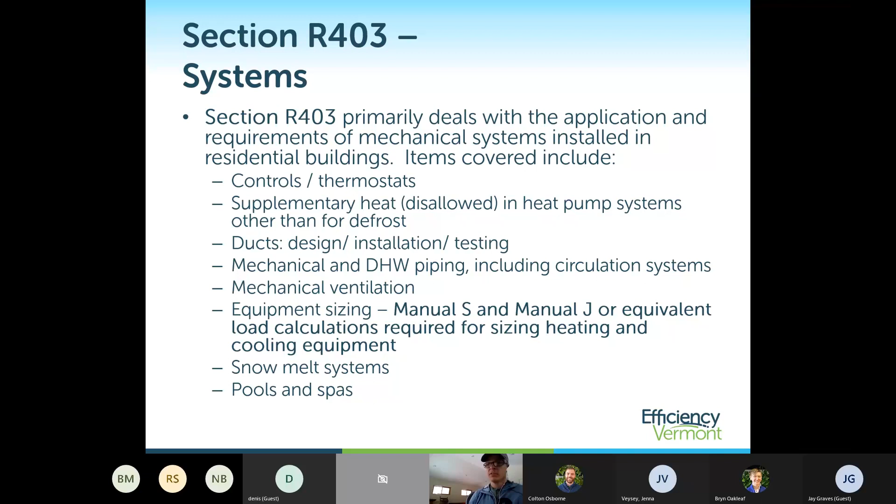R403 covers building systems, so we're talking mechanical equipment here. This gets into the details of sizing heating and cooling equipment for the house, and specific requirements about installing mechanical ventilation, which is its own subject we could talk about, and we do have trainings we offer regarding ventilation requirements for code. This means you do need to be providing mechanical ventilation for the house, not just venting building assemblies. So Section 403 covers those specific mechanical component details.

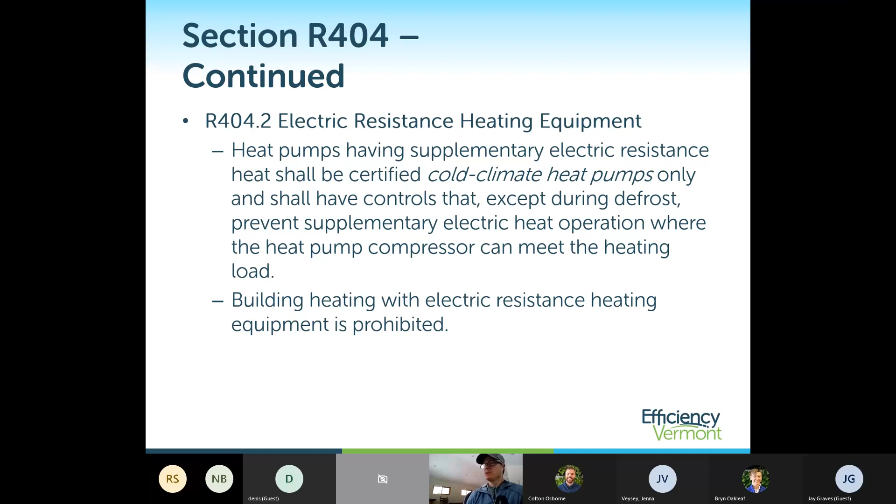And just briefly, electric resistance heating is prohibited, so you can't generally use electric resistance heat throughout a house. There are some exemptions if you're using air source heat pumps or other non-distributed heating equipment in the house to have limited resistance capacity in use, and that's covered under Section R404.2.

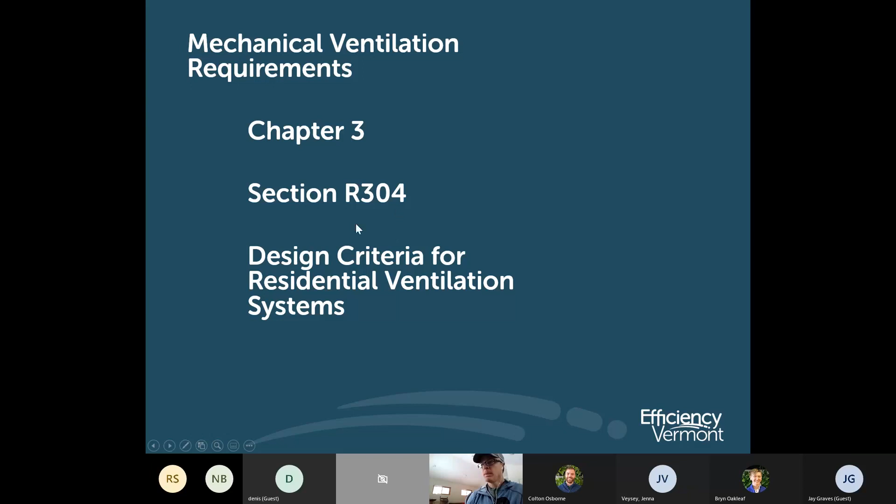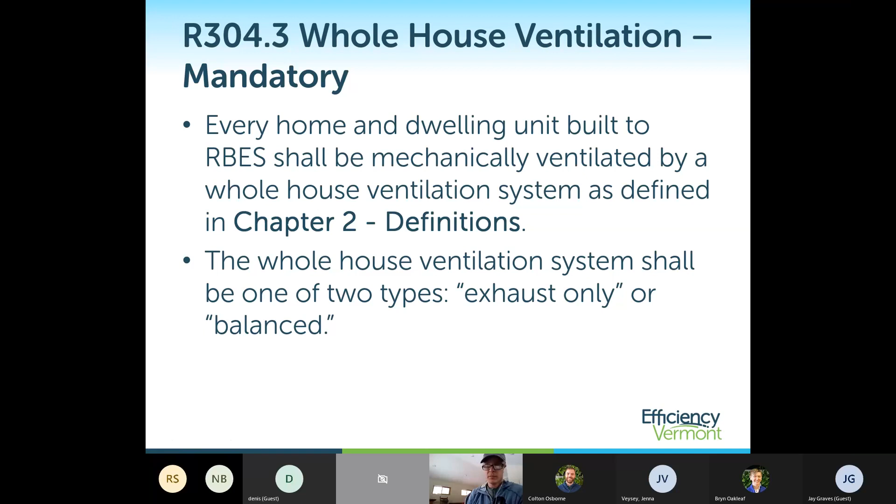So finally, just to briefly touch on the mechanical ventilation requirements, there are components called out in Chapter 3 as well as Chapter 4, but every home needs to have a mechanically vented whole house ventilation system. This means it can be exhaust only, using bath fans essentially, or it could be a balanced system where you're bringing in fresh air directly through a mechanical system as well as exhausting air out. But it needs to be a whole house system and needs to be set up to run automatically. So just having bath fans that a homeowner can turn on or off with a switch when they use the bathroom is not considered a whole house ventilation system. Those fans would need to be controlled automatically to provide the required ventilation rate throughout the day.

So there's a prescriptive table way of complying with the ventilation requirements, or you can use some industry standards for actually doing more careful calculations based on the size of the house, number of bedrooms, number of occupants, and building envelope air leakage rate, to get to what you're looking for here, which is how much capacity of ventilation equipment you need in the house. So this is the prescriptive way you can meet the ventilation requirements for the code.

You can use this table based on the number of bedrooms in the house. So let's say if you've got a 3-bedroom house, you need to put in at least one fan that's rated at 100 CFM capacity on some sort of automated control, and you can comply with the code that way.

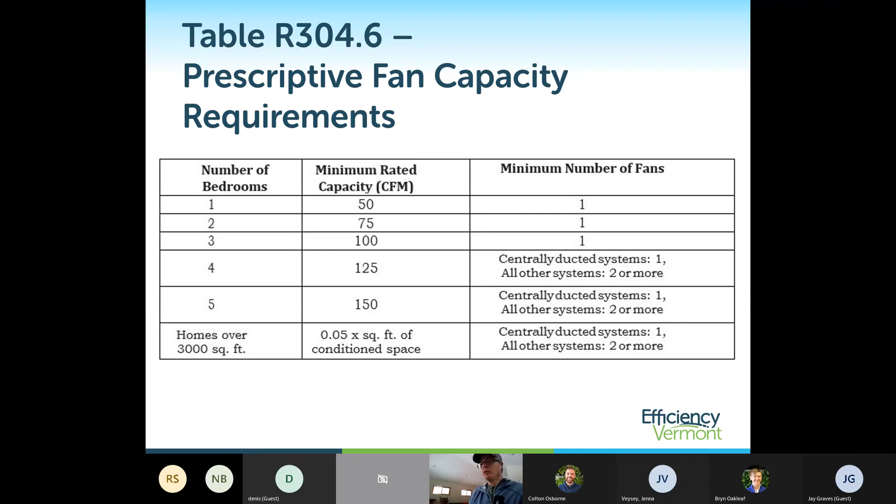But I'll leave you to consider if one bath fan in a 3,000 square foot house is going to provide adequate whole house ventilation. I'd leave that up to you to decide, but you can comply with the code doing that. Alternatively, you can look at a more distributed whole house system.

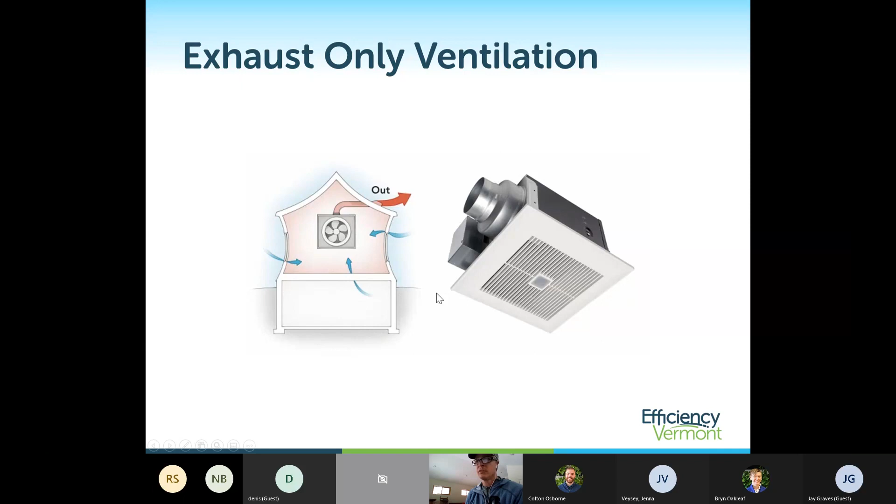So again, whole house or exhaust-only systems, you're just sucking air out of the house and relying on leaks through the building shell, through the building envelope, as your fresh air for the occupants. Whereas a balanced ventilation system, you're drawing in from the outside an equal amount of fresh air as you are exhausting air from within the house.

Ventilation's there. These systems need to be in place for indoor air quality. And indoor air quality means removing contaminants, pollutants, and moisture from the house. Moisture is a big thing, and keeping relative humidity in check in a house is huge. And it's very hard to achieve that with exhaust-only systems.

And with balanced systems as well, you're gaining the benefit of heat recovery. You're recovering the heat energy of the exhaust stream of air, and it's preheating the incoming fresh air coming into the house, rather than just sucking warm air out of your house and expecting the building envelope to leak to get your fresh air requirement met. And you also get filtration of the incoming air as well, because the air handler itself has a filter in it, so you can improve the overall air quality through that filtration system as well.

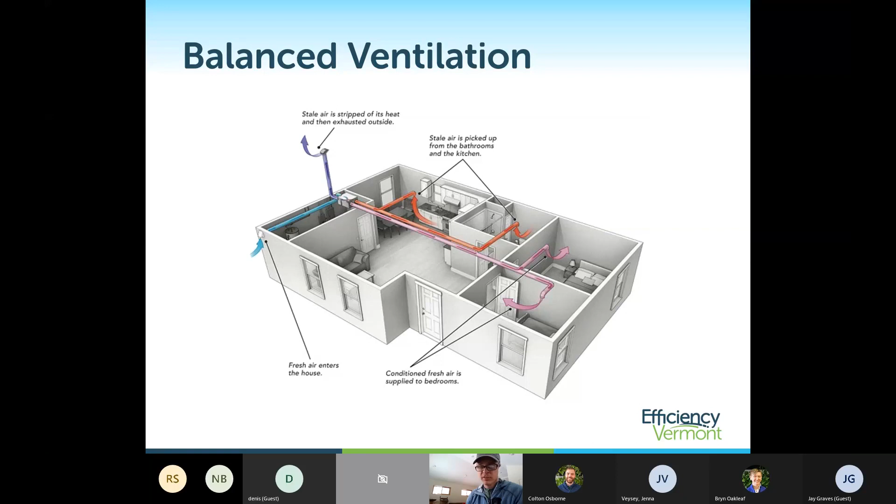So you need to make sure that you're venting bathrooms adequately as well. There's minimum airflow requirements for bathrooms that need to be met, on top of meeting the whole house ventilation requirement.

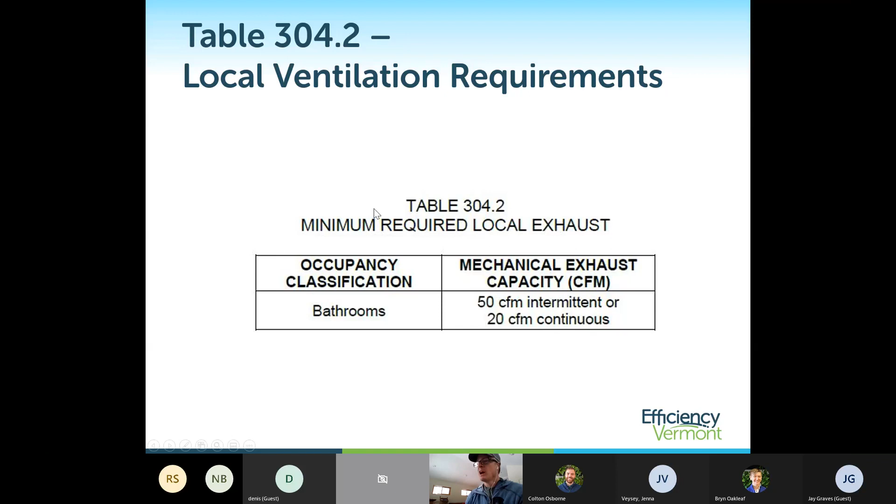But again, base code, balanced ventilation or heat recovery balanced ventilation is not required. You can use exhaust only, but if you need to meet stretch code, or if you're going to use REScheck or HERS rating as your path for compliance, you do need to start putting in those balanced ventilation systems. And there, there's minimum performance requirements for them.

So the difference between an HRV and an ERV: an HRV recovers the heat energy from the exhaust airstream, whereas an energy recovery ventilator is also going to recover the heat as well as a percentage of the humidity in the air. So there's debate back and forth to consider which one versus the other, but there's minimum efficiency requirements depending on the equipment that you choose to use.

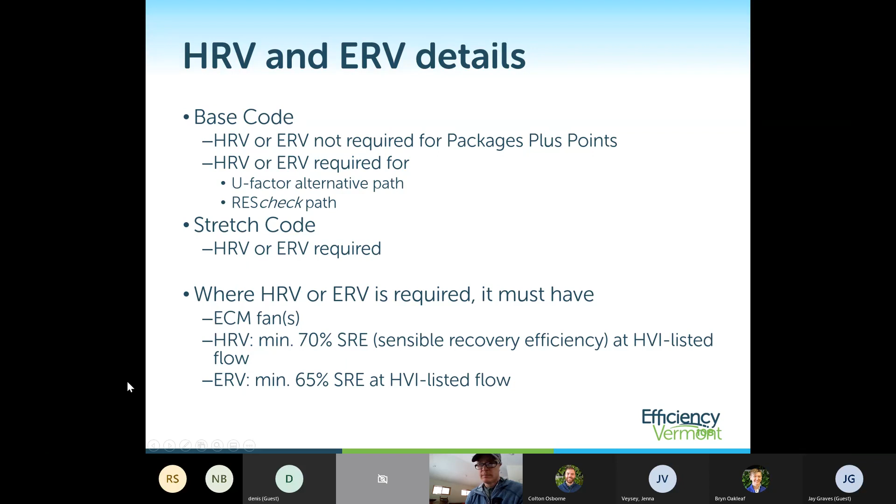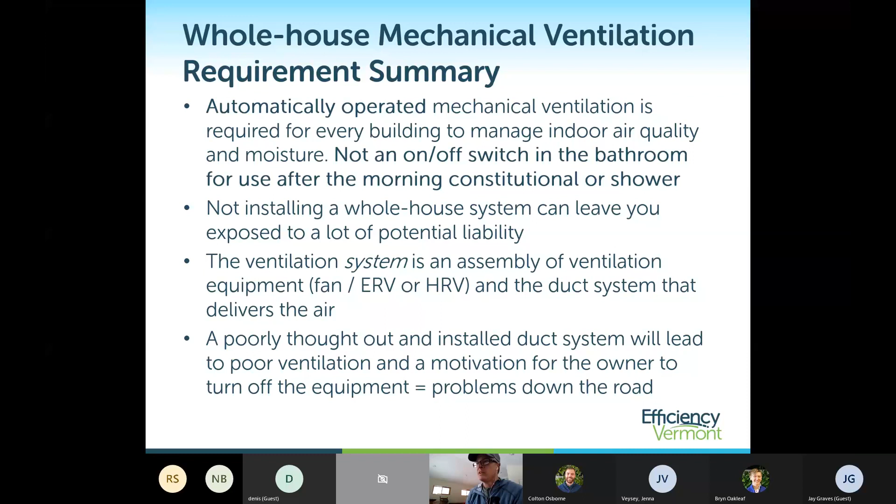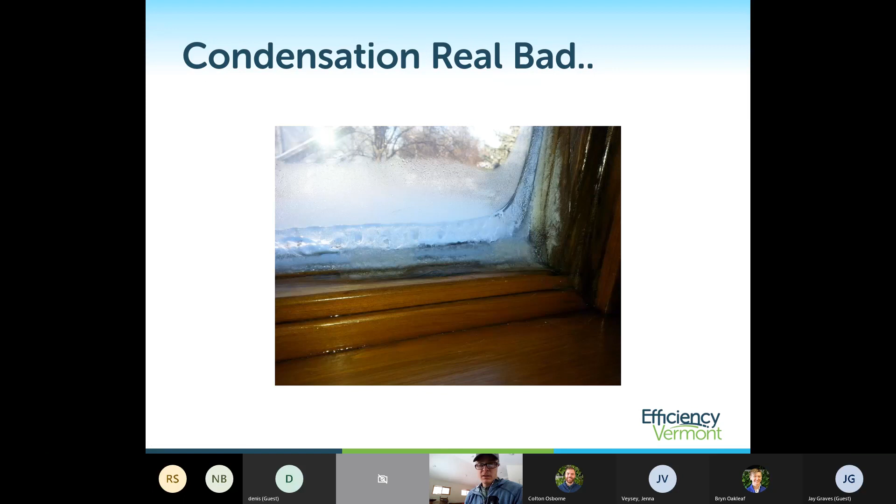Bottom line is it needs to be automatically operated, so it's not at the homeowner's whim to run the ventilation system or not. This is especially crucial in the winter months. You can argue you can turn the ventilation system off in the summer if you got the house all opened up, but you definitely need an active and adequately sized and functional ventilation system running in the winter, because condensation can happen and it can get really bad if you're allowing these things to happen unchecked.